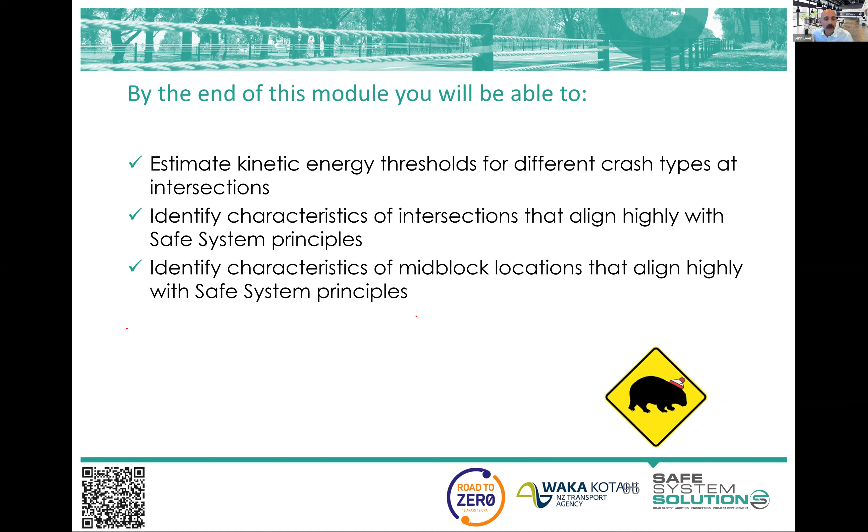So let's talk about intersections. Intersections are this interesting point on our network where we see increased risk due to a number of factors, the most obvious one being the conflict points that we have.

For those who aren't familiar with the term conflict points, I'll show you a conflict point diagram a bit later on, but it essentially is the ways that two vehicles, or a vehicle and another road user, can collide—that point of conflict.

So interestingly, when we see a graph of risk for a length of road, what we'll inevitably see is the risk goes along at whatever level it is, bouncing around a little, but then it'll spike, and spike again, and spike again—and these are our intersections. So we have a sort of mid-block inherent risk, and then we see a spike around that intersection due to those conflict points and the ability for that crash to happen.

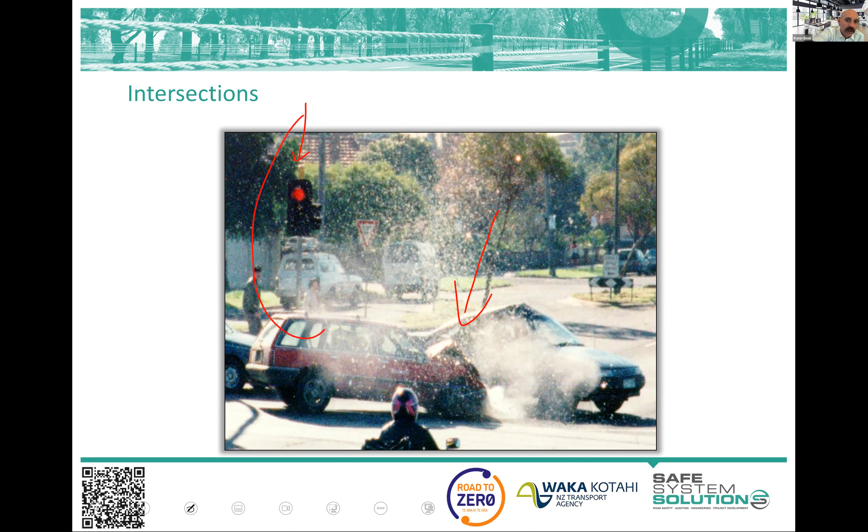And signal pedestals are a very interesting one because those are rigid hazards—some have some collapsibility or frangibility, but they're fairly rigid objects, and we place them very close to running lanes, just burying our head in the sand away from those as a run-off-road risk. Interesting way that we've just somehow decided that's exempt from being a roadside hazard.

But I'd love anybody's comments on that, or if they've done any work in that space. I know there's some investigation of a much more frangible signal pedestal, but I haven't seen anything significant. I feel there's some merit to that US style of casting wires over your road and hanging your signals, because you can get things further out, and use of mast arms and the like.

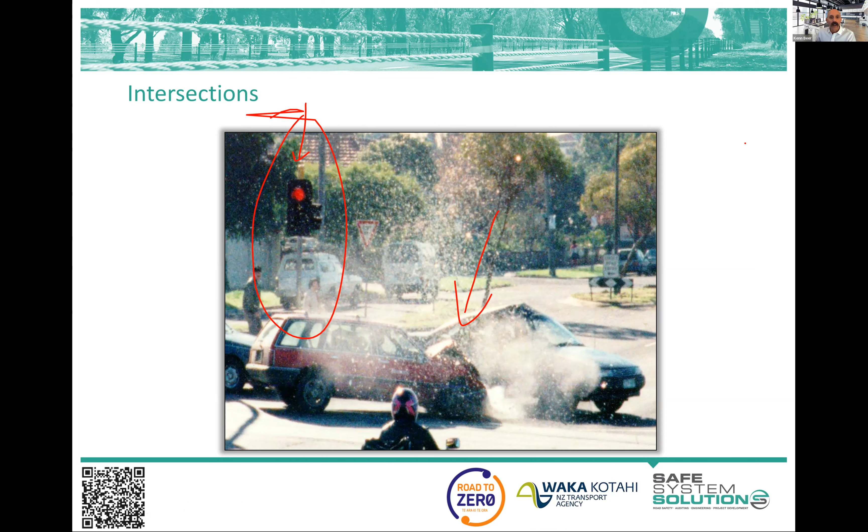Fewer vehicles and fewer intersections. What we're actually addressing with those two is the exposure to crashes. So we're saying there will be fewer people exposed to intersection crashes if we have fewer vehicles going through there, or we have fewer intersections.

Then if we're talking about conflict points per intersection—there's a whole raft of other stuff within that, but we'll just stick to conflict—that is the likelihood of crash. The chance that you'll crash increases with the amount of conflict points; there's just more chance that you will collide with somebody.

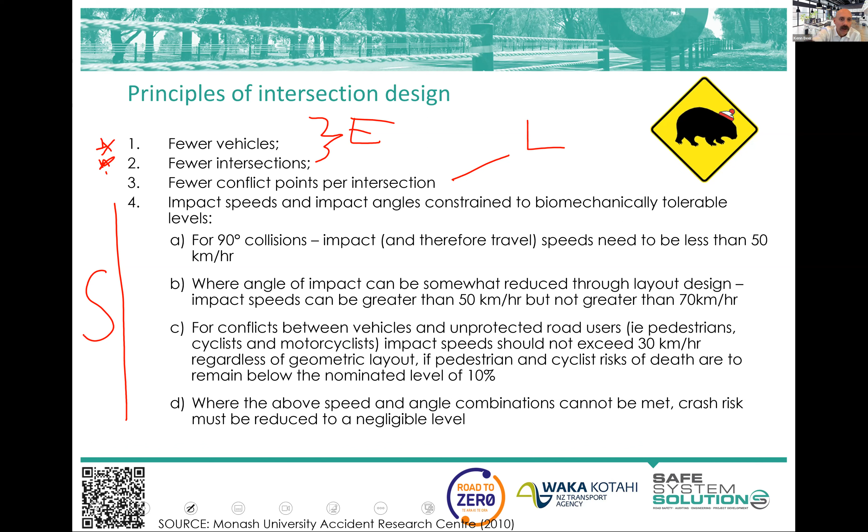Then we've got all of these things that address the severity of crash, which are speeds and angles, thinking about the biomechanics of the human body and how much force we can handle. So we talked about some of the speed thresholds, and we're thinking if it's a 90-degree collision, we're thinking less than 50 kilometers per hour. If you can get more angle on that, we can increase that speed.

So if you cast your mind back to your high school physics days and remember vectors at all—if you crash, or if you have vectors that are like that, you have some energy pushed out to the environment. If you have the vectors like that, more of the energy is pushed out into the environment. You can visualize that quite easily with vehicles; if they crash a bit more like that, they're sort of bouncing off each other.

So this is what we're thinking about, where we can get a little bit more speed out of an intersection by adjusting the angle that the crash might happen at. Of course, pedestrians, cyclists and motorcyclists—our vulnerable road users—we knew that threshold speed around 30 kilometers per hour. And if we're not able to meet these biomechanical thresholds, we should be looking to alter the intersection design, or the way we are exposing road users to risk.

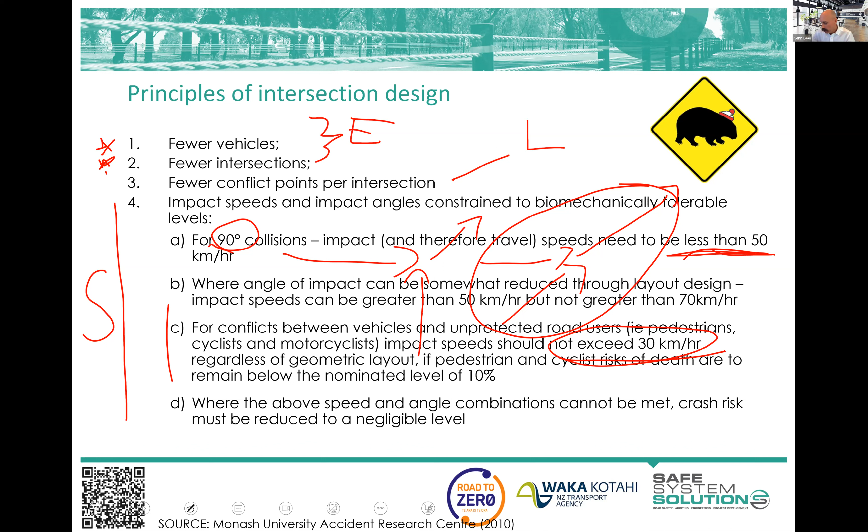So here's some more basics around speeds and angles, and this is passenger vehicle crashes. You can kind of have passenger vehicles crashing in pretty much any configuration at that 40 kilometre per hour, and everything's generally okay. I mean, we don't want that to happen, but we generally can bring that within survivable levels.

So if the threshold's about 50 for that right angle, being pretty much our worst crash type, then as we get more angle, we can get more speed, for head-on and rear end crashes. Now rear end's a bit of a funny one—there's a bit of industry debate around rear end and how that works. You've certainly got some physics advantages going with you, where vehicles are getting pushed forward and the like. But we do see some pretty severe spinal injuries and things associated with rear end crashes.

But generally, we talk about 70 kilometers an hour for rear end and head-on crashes. And at 80 kilometers an hour, we say not feasible—you cannot operate with our current fleet and the energy management and the biomechanics of humans; we can't operate an intersection at 80 kilometers per hour or above.

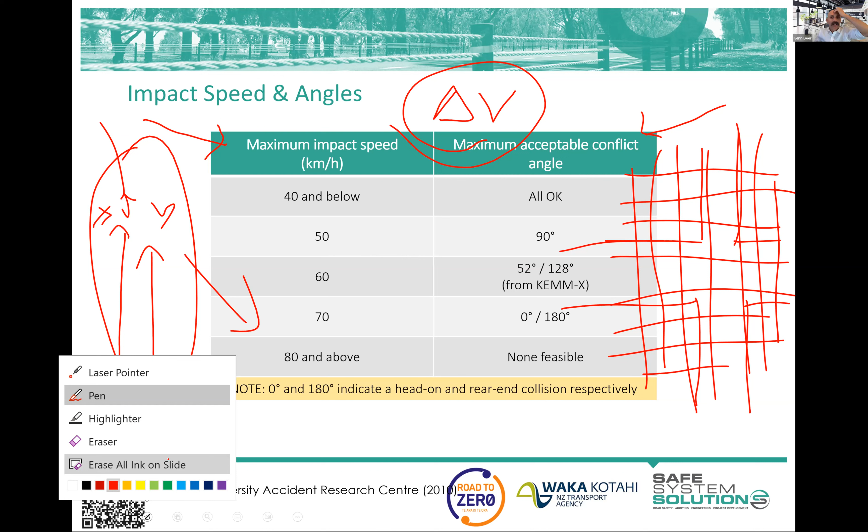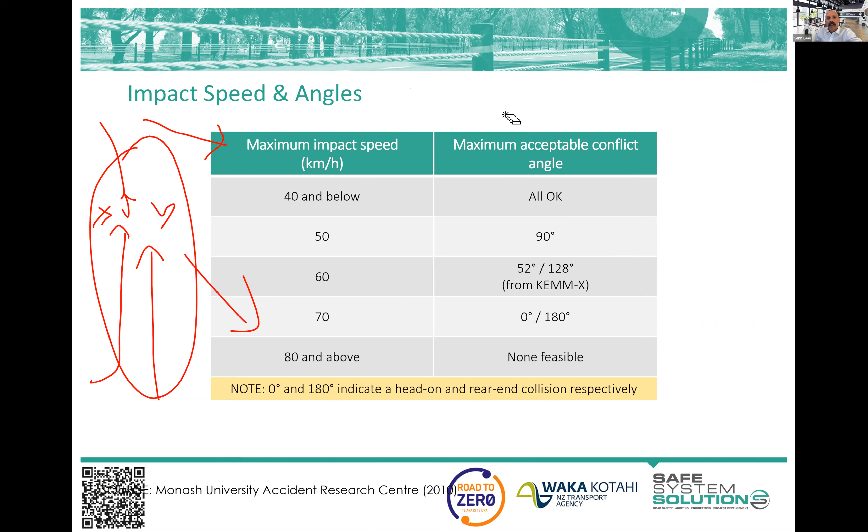It's practically, for our purposes, not going to be useful. It's not what we want to be doing. What we do is we look at an intersection and we try to holistically say how are we getting better alignment with safe system principles, or not getting better alignment with safe system principles, at this intersection as a whole.

So if we have an intersection and we block off a leg here, yeah, we've removed a lot of conflict points, that's for sure, but we have not changed the exposure at the intersection based on conflict points. We may have changed it based on the number of vehicles that get into that intersection. We'd be thinking about how many were in there and how many are now able to get in there. But the simple conflict point analysis - the fact that we've significantly reduced the number of conflict points - we're still thinking about exposure based on the number of vehicles, pedestrians, or cyclists.

So I'm going to continue to give you examples of this. Looks like we've got a hand raised. Kez, do you want to? Oh no, maybe that was an accidental hand raise. Somebody wanted to explore this in more detail. Yes, okay, an accidental hand raise. No worries.

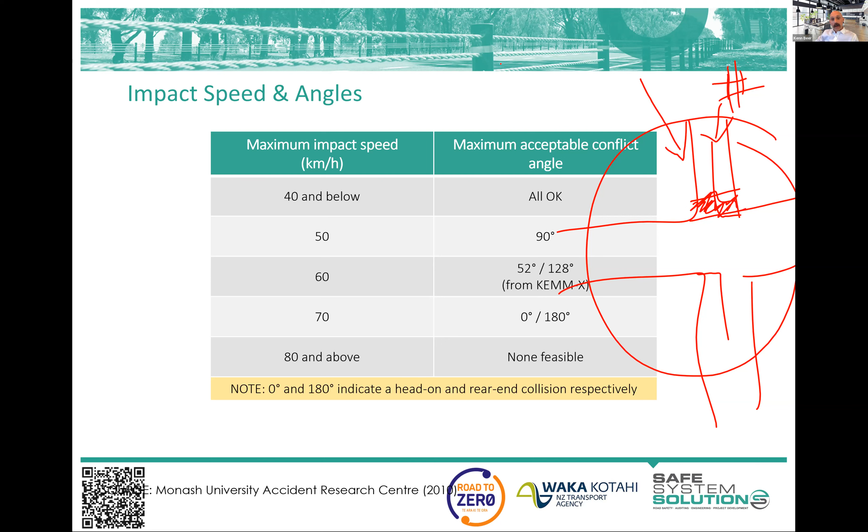Yeah, I'm gonna keep explaining this, and this is kind of the topic of your assignment this week, because we want you to really get that clear in your mind how you categorize these exposure, likelihood, and severity.

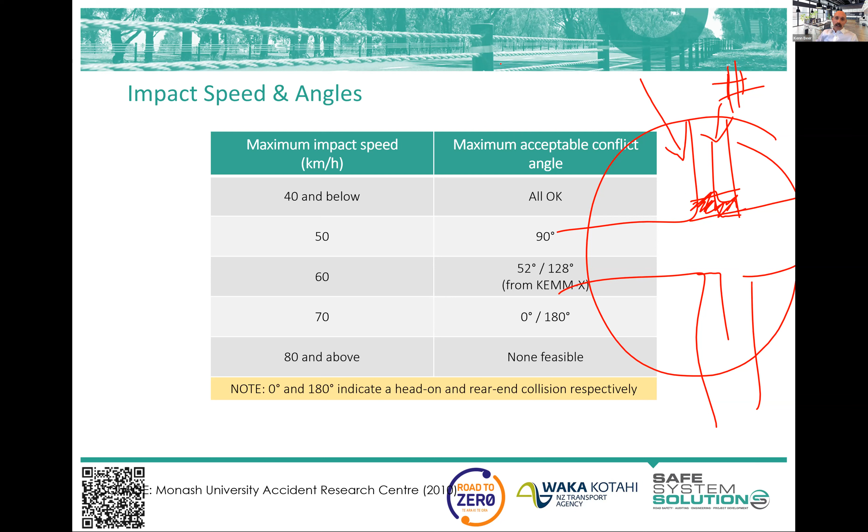Now, at a very basic level, I want you to start thinking about intersections and thinking about angles of crashes when we're thinking about crashes with passenger vehicles. You don't need to be this precise, as you see on the diagram here.

We just generally think through what's the crash that could occur and what's the angle that it could happen. I'd be thinking, okay, that's about a right angle. Peers that are designers here, using CAD, have spat out that it's 104, but it's kind of close enough to 90 degrees. That, I would be saying, okay, passenger vehicle to passenger vehicle.

I know I've got that threshold speed of about 50 kilometers per hour. That's what I'm aiming to get vehicle speeds down to, as in the bullet vehicle, the one that's coming in this way. Over here, I've got a lot more angle now on that bit. I could actually say that that's more like 60 kilometers per hour as my threshold speed. So you can see just immediately, I've got the road users involved in the crashes that I'm expecting, I've got the angles, and I'm starting to think about speed.

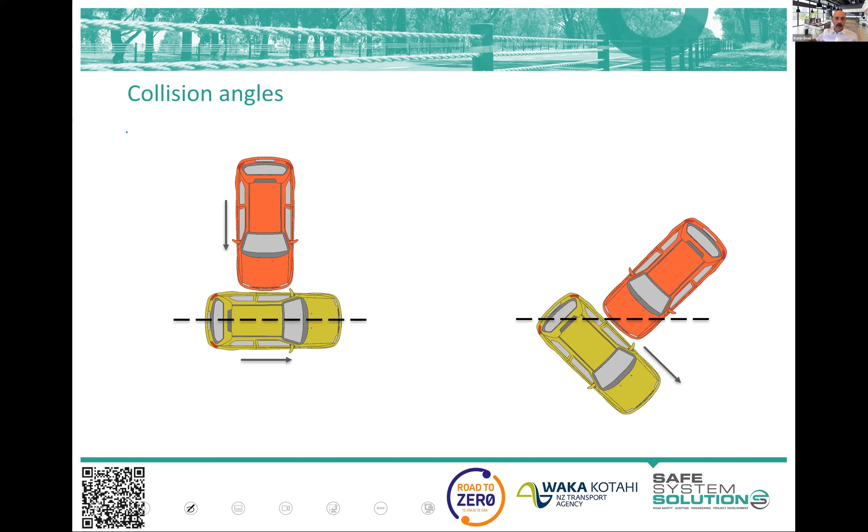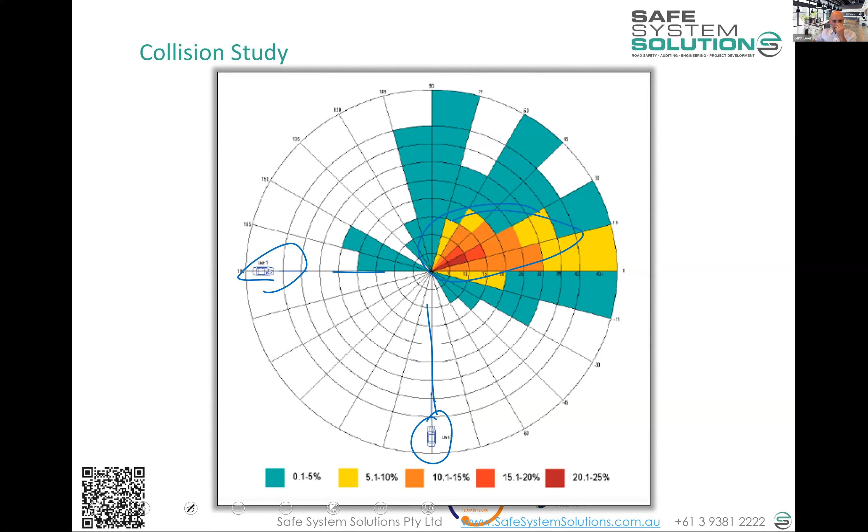And here's a bit of research that maybe didn't need to be done. It was done by the University of Adelaide, the Centre for Automotive Safety Research, looking at a whole lot of intersection crashes and the secondary impacts that cause death and serious injury. You can see they replotted them all onto the axes here, where the vehicles came in, and that's where the secondary crashes were mainly occurring. I think I probably could have given you a blank one of those and you would have come up with pretty much the same, but it's just something to be thinking of.

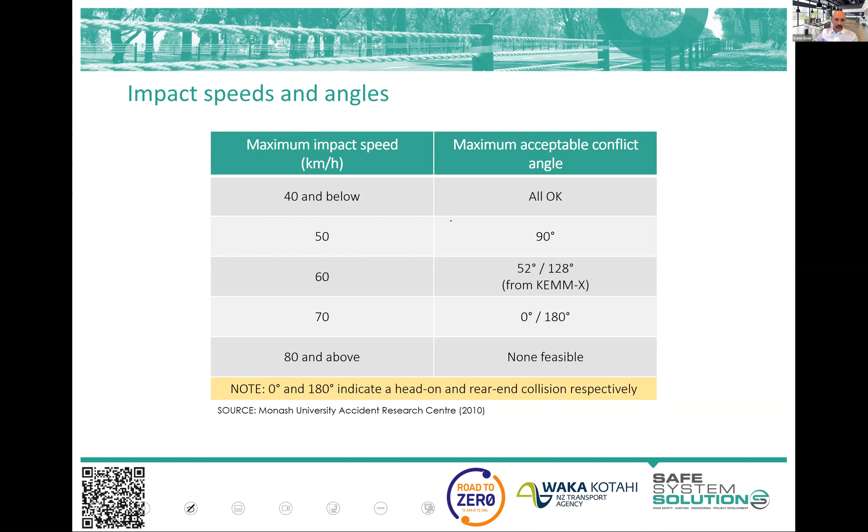So I can't stress enough that you need to start equating angles for passenger vehicles, speeds, to energy thresholds.

Okay, I'm going to give you a little task to do. I'll give you a little bit of time to do this as well. It's what I call the safe system intersection exercise. So we have an intersection here. It's existing, obviously, because you can see it. And I'm going to give you some information about this intersection and then give you your task specifics.

So what we have here is, let me change color here to red. We've got an arterial highway, like a highway, and we've got a 70 km/h speed limit on this 2-lane in each direction road. It's a highway. It carries about 12% heavy vehicles. It's got somewhere in the order of 22,000 vehicles a day. It's a bus route. That's a bus stop there.

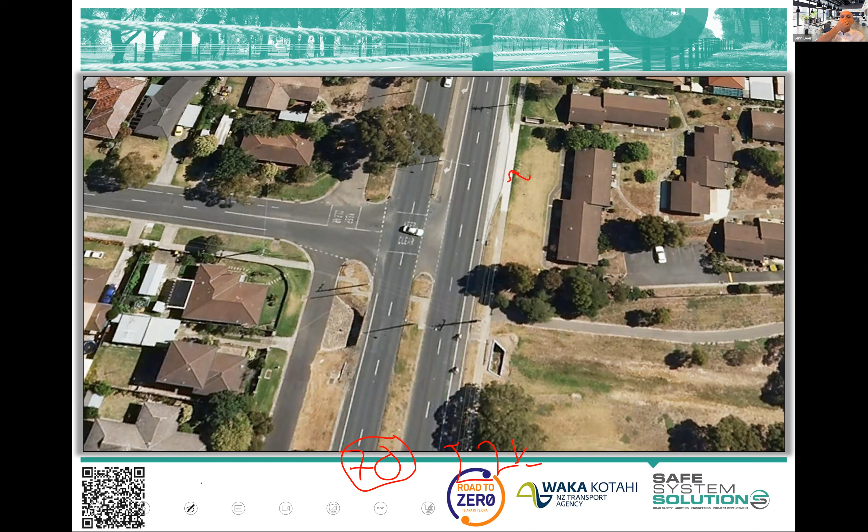This side road, the intersecting road, that's a 50 km/h local collector road. It has about maybe 2,500 vehicles a day, so it gets a bit of traffic. There's a school sort of down the road here, quite a large school, maybe 300 to 400 meters down the road. This is all residential area, as you can see.

This is like a drainage culvert, drainage structure. That's a shared user path, for pedestrians and cyclists. This is a service road, two-way service road. And there's a bit of a pedestrian refuge there, and then what I would call a Danish offset crossing or a Z crossing, which is annoyingly the wrong way around, because you should face traffic as you walk into it and walk along. But I've got it the other way around. Minor little issue, very minor.

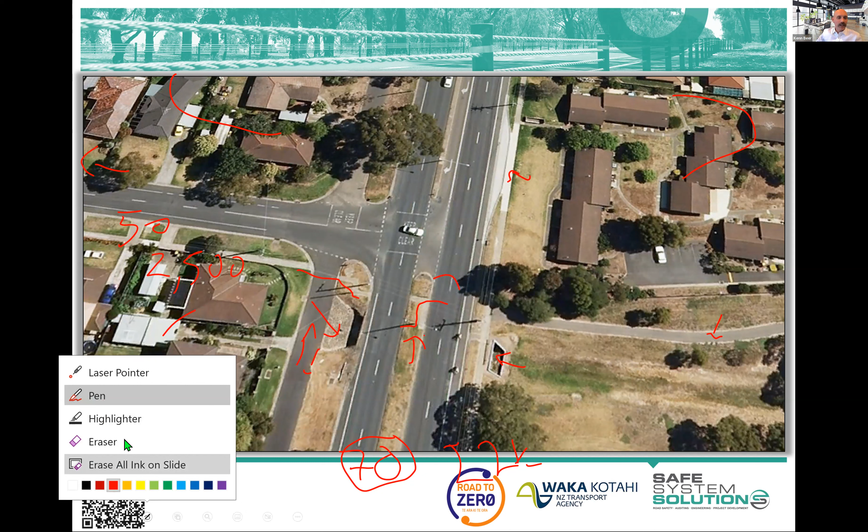That's not going to be the source of our major death and serious injury, but probably one that makes the road safety auditors in the group's eyes twitch when they look at it.

So yeah, that's some intel about this intersection.

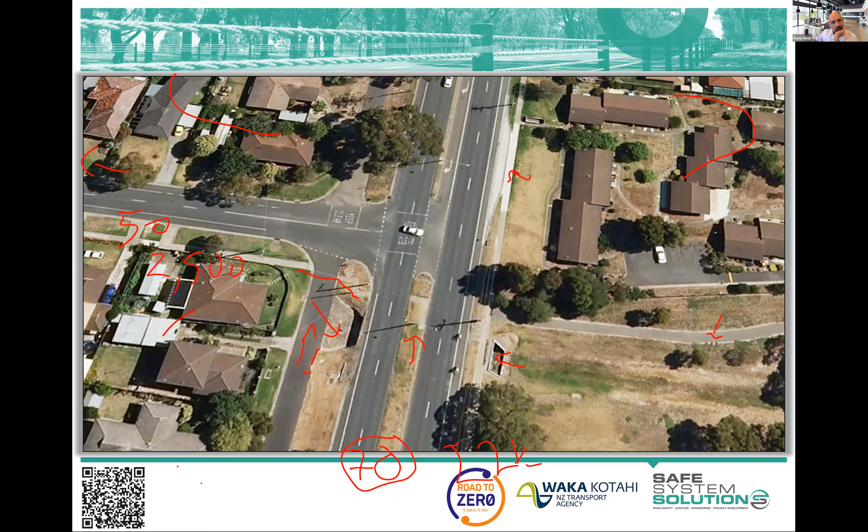So let's have a look from the ground level. You can see it there - that's where that intersecting road comes out, and see the bus stops there. You can see it's got a turn lane, lighting.

Let's have a look from the other direction. There we go - you can see over here is our shared user path that comes in. That's the drainage culvert structure thing there. You can see a sort of shoulder/bike lane thing going on here.

So what your task is to alter things so we remove death and serious injury crashes at this location.

Now, I'm going to give you a budget. Because I like this group, I'm giving you an extra $1 million - you know, $4 million.

But you can't close the intersection because we've done the community consultation. There's really no other good ways out without running a whole lot of vehicles and buses through residential areas for a significant period. So that's unacceptable, and you're operating within the current political and organizational framework that you're currently in.

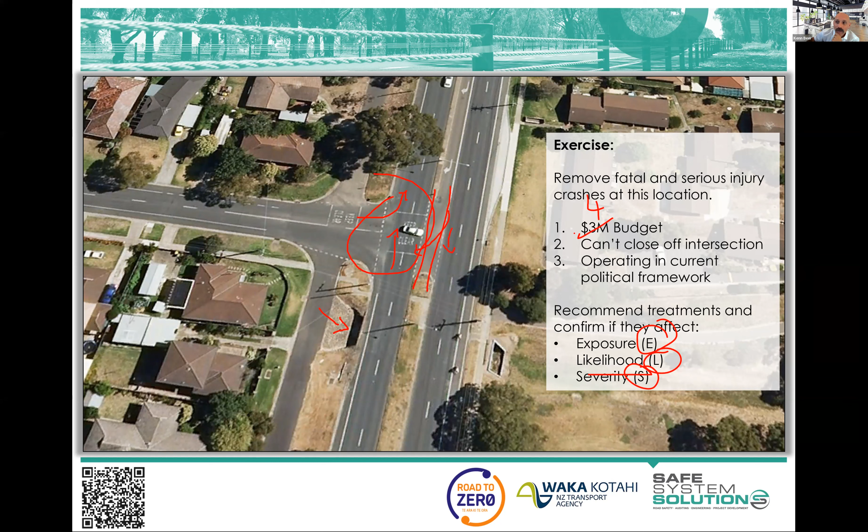So Karen's popping in some guardrails and very well identified that is a reduction in the severity of crashes. So if we were to put guardrails along here, vehicles would leave the road. They wouldn't fall into the culvert. They would hit the barrier and they would run along the barrier. But that's still a crash - it's just a much less severe crash than dropping into that culvert. So spot on there from Karen, that is a severity reduction.

And that's a little tricky one, I think. So that's prize-worthy as well, Kez. So Karen can have a prize for that.

So I'm just, now this is where I'm going to skim through a little bit to look for some things that are a little bit out of the ordinary, or sorry, out of what most people seem to be saying.

So Douglas can have a prize for his accurate categorization there. Raised safety platform on each leg, severity - correct. Traffic signals, likelihood - correct. Reduced speed limit from 70 to 60, likelihood - correct. You could almost put in there severity as well.

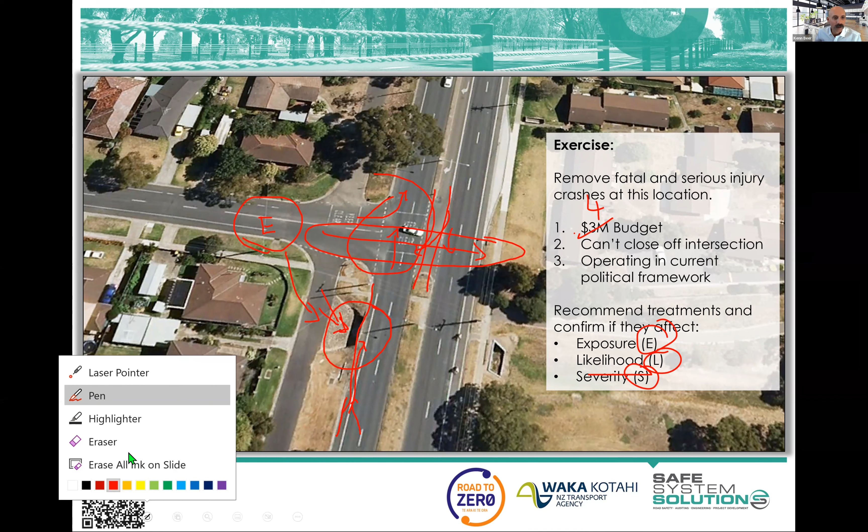Oh, I'm struggling to get my... bear with me a second here. That's what I'm trying to do. Too much writing on my slides already.

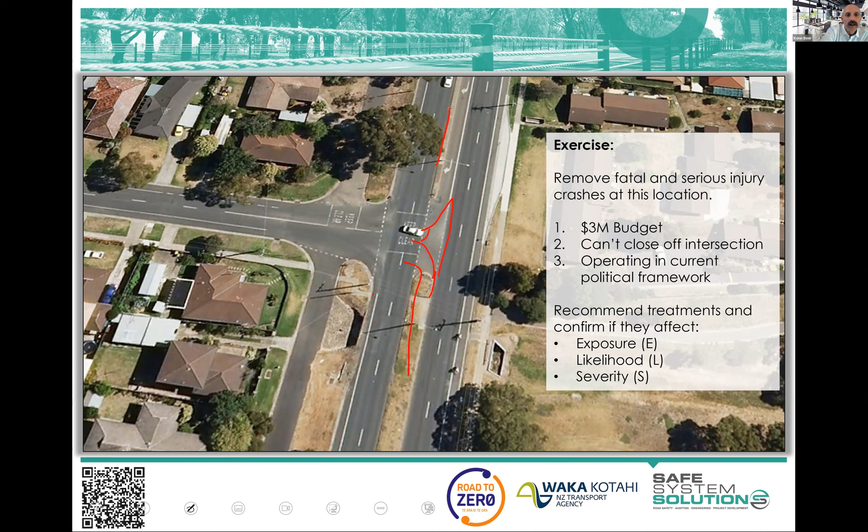A seagull intersection, for those who aren't aware, would have some sort of acceleration lane and a separator. Vehicles come out and then accelerate down the road.

This is probably one of those cases where, going back to earlier comments, it reduces the severity of the crash because of the crash angles. But the likelihood of a crash goes up because merging from the right is an ugly maneuver, looking across the wrong shoulder. If you've got an articulated vehicle like a truck carrying something, you can't turn your head and see. Old people often can't make those head checks either. It's just very awkward, and you'll significantly increase crashes in a lot of locations depending on how it's designed. We still get crashes there that are pretty much 90 degrees, so there are challenges associated with that.

But there are situations where seagulls might improve things. I personally don't like using seagulls, but there is some interesting work that was done by New Zealanders.

Shane Turner developed this, and for some reason, John, I reckon you might have been involved in this—correct me if I'm wrong. It's a seagull intersection assessment tool, so you can plug in all your data—volumes, speeds, configuration—and it spits out a risk score and an indication of the risk associated with a seagull.

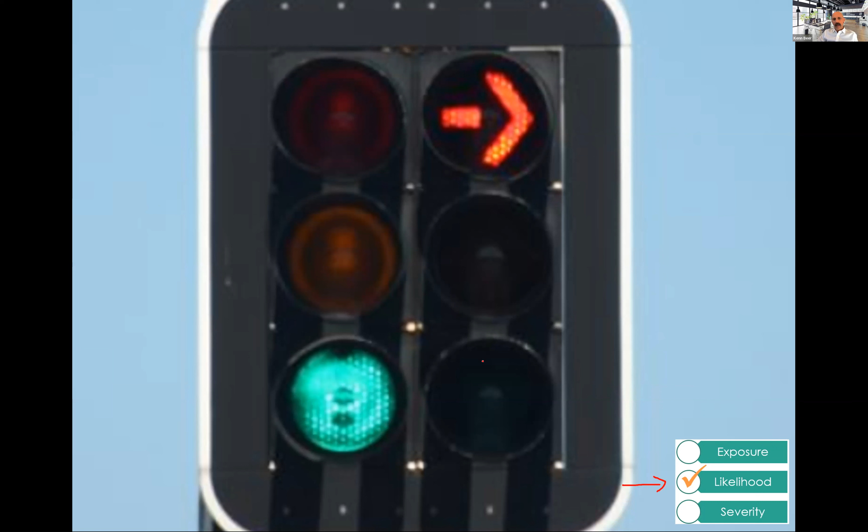Signalization was identified pretty early on as a pretty viable treatment. I think that shows people understand how a network functions and what treatments to use. But we solely attribute the risk reduction with signalization to likelihood. Now, there's an argument that some crashes happen because people see the red light and slow down, so when they crash it's at lower speed—surely it's severity as well. And yes, that's true, but there's still very much the potential for somebody to continue through at speed.

We see that a lot—people run the red light, and we see those crashes happen at the same severity, sometimes even higher, because they're putting their foot down. Sometimes people say we've reduced the exposure because, take this example, they've given a red arrow, meaning they're not exposed to the crash because they've been told not to go. But under safe system thinking, we have to acknowledge that people will make mistakes—they will run red lights, they will turn when it's not appropriate, these conflicts will still exist. The number of vehicles, pedestrians, and cyclists through that intersection doesn't change by putting signals up, so the exposure doesn't change. We're just addressing likelihood with traffic signals.

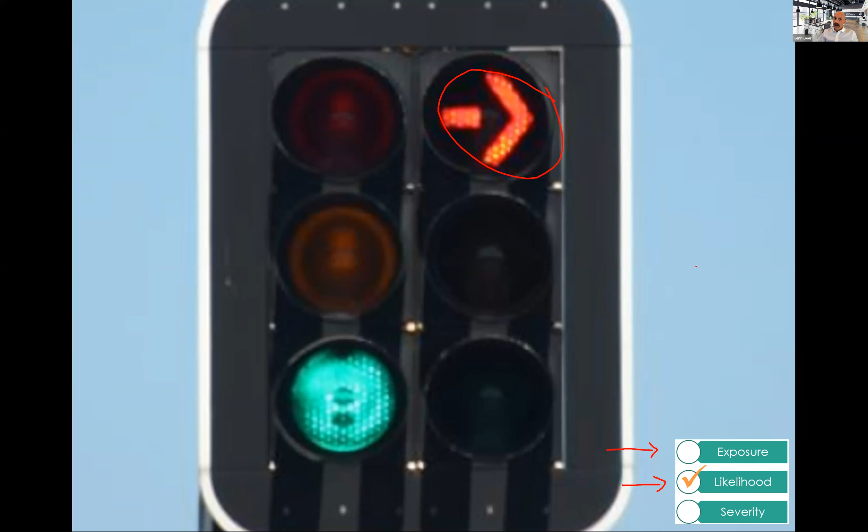They are an effective treatment in reducing the likelihood of crashes. Rule of thumb: 45% reduction in crashes associated with the introduction of traffic signals. That's pretty good, right? So absolutely not a bad treatment from that perspective.

When you analyze the biggest location, the spots of most death and serious injury on any road network, the overwhelming majority are large signalized intersections. It's just that they are often put into this category of, well, we've done everything we can, and people just need to start following the rules and not running red lights. That's where we've really got to question this, don't we?

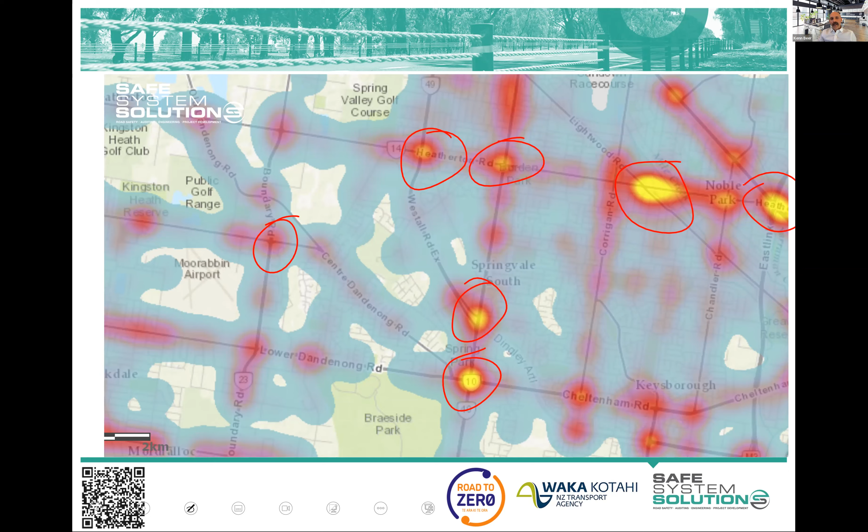So roundabouts, and I like the fact that a lot of people said, can I afford a roundabout, can we get that in? Roundabouts we attribute to a reduction in the severity of crashes. Somebody also mentioned likelihood as well, and I like that because they're thinking about reduction in conflict points. What we tend to see is this shift with the roundabout. We get about the same number of crashes when we have a roundabout or a priority controlled intersection with give way signs, stop signs, and things like that. It's just the severity is so much less.

We actually sort of alter crash types here. There's a lot of rear end crashes, minor crashes, little bumps and scrapes at these sorts of intersections between passenger vehicles. So we generally, in a safe system assessment, attribute it all to a reduction in the severity of crashes when we're thinking holistically about that. Roundabouts for passenger vehicle to passenger vehicle crashes are just amazing, right?

I'll talk about pedestrians and cyclists. I see comments coming in about pedestrians and cyclists at roundabouts, and there's some really wonderful things we can do for pedestrians and cyclists at roundabouts. But if we're just talking passenger vehicle to passenger vehicle, these are just amazing features.

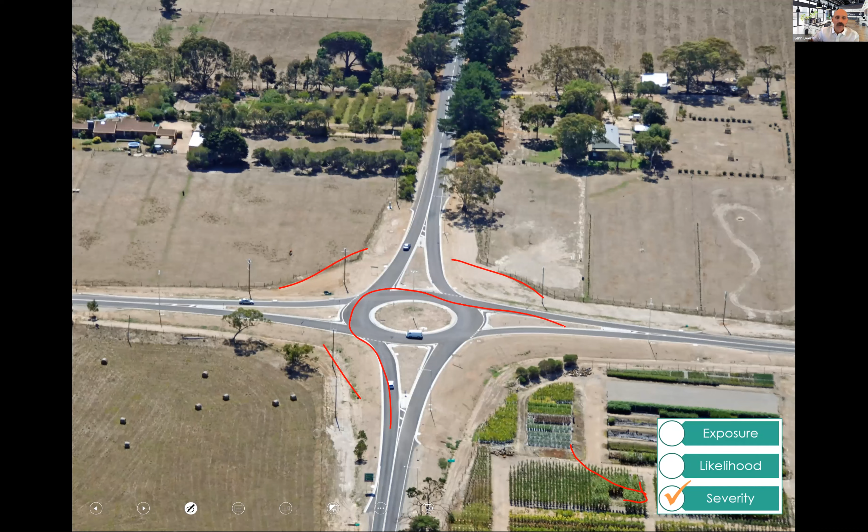What about just something little like this? Very different road environment, isn't it? But nonetheless, these road environments - and something like this will cater for larger vehicles because they just run over the top of it, won't they? Yeah, you might need to just check your swept path on the splitter islands and those sort of things, but you've sort of removed that part of it.

But then you might think, well, have I just lost all the advantage of that deflection and the like? Well, the advantage and the reason these actually work quite well - not as well as a big roundabout, but pretty amazing for what they are - is because we have eliminated the perception of absolute priority. When I say perception of absolute priority, you could say absolute priority. What do I mean by that?

If this was a T intersection and this top road just had free flow priority, vehicles would go through here with drivers somewhat tuned out, carrying on at the speed they're carrying on, pretty much oblivious to the fact that there's an intersection. We'd love drivers to be alert and have a look, but they don't - that's not how the bulk of the public are driving. But as soon as you put this in, we disrupt the absolute priority. So a vehicle approaching here isn't sure that they're not going to have to give way. Same here, same here. Everybody slows down, has a look around, wakes up. We've got wins.

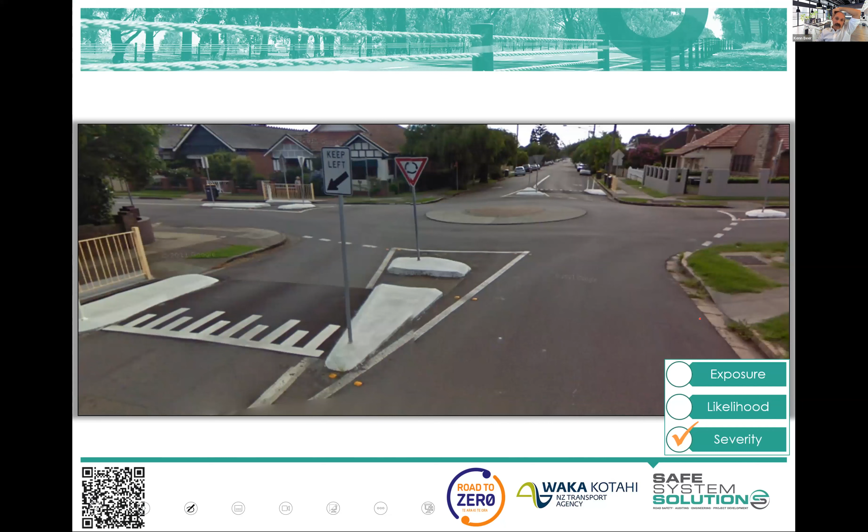If you're worried about fast speeds through and the fact we haven't got angles altered, you can put raised bits and pieces around your roundabout to slow vehicles down, speed cushions, lots of options for that. So we can get some pretty good treatments. Max McArdle, my colleague, is going to take you through some pedestrian and cyclist stuff, but often utilising these as raised pedestrian crossings can be a pretty awesome thing. I'm loving seeing the deployment of that around Aotearoa.

It's quite exciting. So, roundabouts - back to passenger vehicle to passenger vehicle crashes. This is Road Safety Engineering 101, it's almost the first thing you get taught, isn't it? A roundabout has a very small number of conflict points, whereas a set of traffic signals or a passively controlled intersection has a whole lot of conflict points. There's your conflict point diagram, just the ways crashes can happen. So that's one thing, and the way those crashes can happen.

There's our example of where we actually do have pretty good sight lines and a really good crash angle, if you're thinking about crash angles.

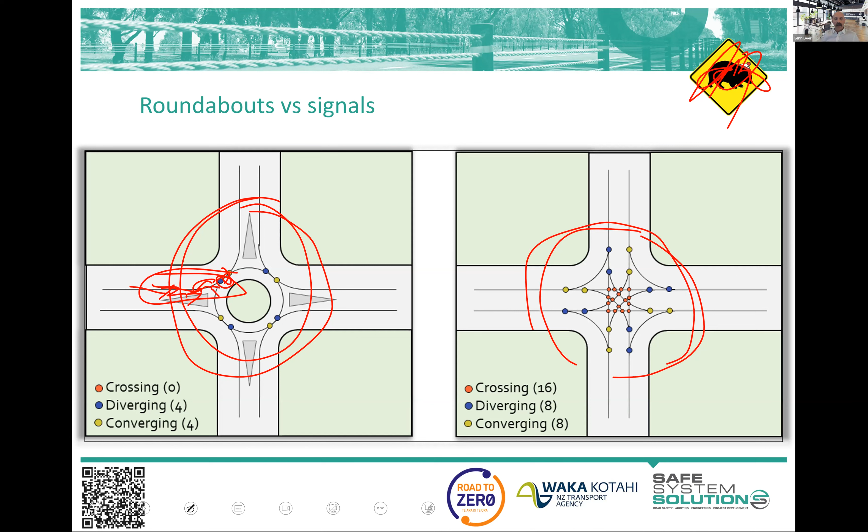I do agree wholeheartedly that it's a much simpler thing to do and it's easier to navigate. Traffic signals, I suppose, though, are fairly easy to navigate if they're done well - it's just a clear stop or go and turn or don't turn. There's just more, I suppose, conflict points there. Hopefully that helps out a little bit.

So we were talking about angles of crashes. And this one's, I suppose, that last little thing I wanted to point out just before we have a break - that disruption of absolute priority, where people drive in all states of consciousness. And I really, we all wish that drivers would be alert and compliant and have a good night's rest and a cup of coffee, and they're really focusing on this driving task. That is just not the case.

They're driving half asleep, they've worked a double shift, they're thinking about the fight they've had with their partner, they've had a few beers, they're making a cannonball run to their brother's wedding to try to get there for the morning. It's just horrible, the states people drive in, right? And you can get angry at it and just push it all back to them and say they need to be better and it's not our issue. Well, it is our issue. I mean, that's what we're dealing with.

And if you're an engineer or a designer or a tech officer or whatever you are, our responsibility is to account for that in our design. Okay, if you want to try to address that, we need to maybe go into another field of road safety and start working on other things. But that's not going to be resolved. But we can design intersections to wake people up.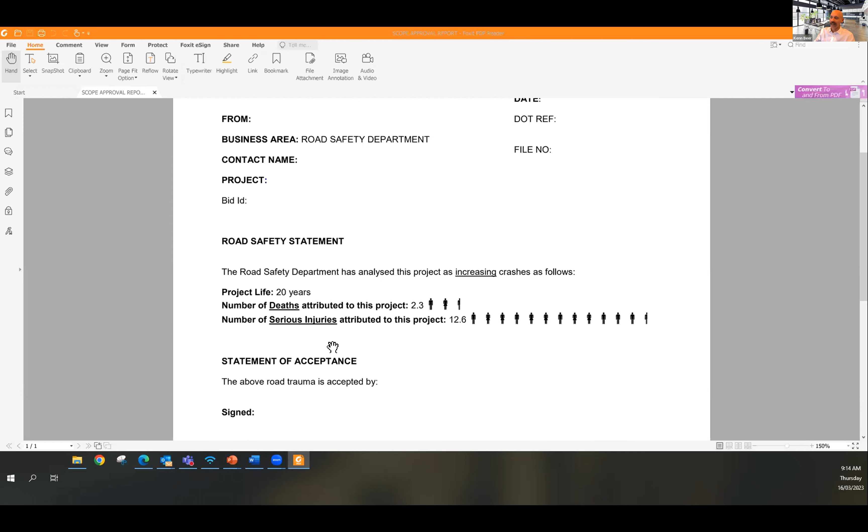It said: the road safety department has analysed this project as increasing crashes as follows. Project life, 20 years. Number of deaths attributed to this project, 2.3 - we put little people there, just to hammer home you're going to kill some people here. Number of serious injuries, 12.6. Statement of acceptance: the above road trauma is accepted by... And so that sat on top of our report back to them.

Yeah, so I hope you can see that screen - Kez, can you see it? Yes, I can see that. Good. We were, to a degree, intentionally disrupting things. Did we ever get any signed? No, of course we didn't. Nobody was signing that. Did we get some pretty angry people calling?

Well, we did - dragged into executive directors' offices, and told: we have a lot of competing demands in the management of the network, and you don't boil it down to these simplistic statements. Well, just if you're going to kill and seriously injure the community for a bit more travel time, okay, sign up to that. Anyway, so they didn't like that. But nowadays I think we don't need to be so inflammatory, because a safe system assessment kind of does that in a much more palatable way.

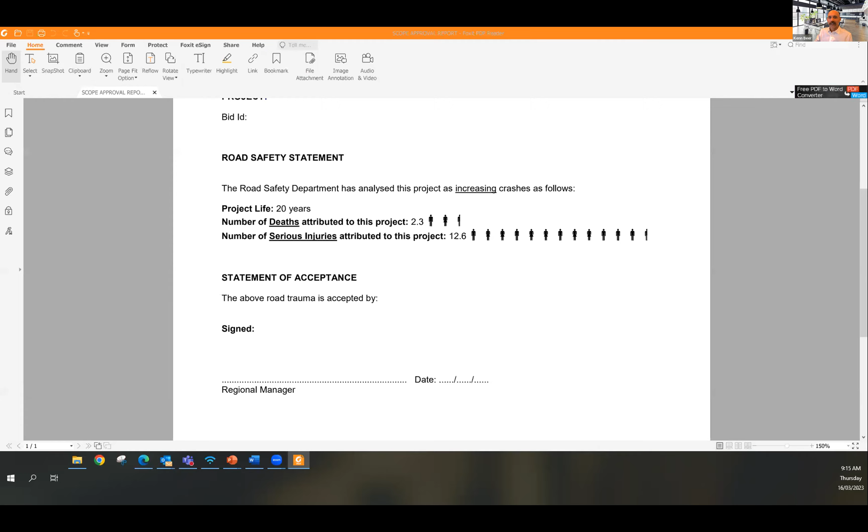Anyway, just thought it was an interesting little case study. The actual working out of those numbers is very easy - you can go into absolute precision on how you do it, but at a general sense, it's sort of like a 10, 15-minute exercise, and you can work that out from existing to the future scenario.

Now, roundabouts aren't all the same, and you don't get as much safety benefit with different roundabout configurations and design - it's a fascinating area. I've been getting a lot into it, writing some roundabout design guidance for different governments in terms of compact roundabouts and those sort of things. But I throw this in as an interesting one for you - double lane roundabouts can cause trouble, especially if the inner radius is small, you can get high speeds. But turbo roundabouts, which are two-lane roundabouts, bring that speed back down to a really interesting level.

So a turbo roundabout, for those who aren't familiar with it, has a raised concrete separator on the approach, dividing your lanes. So if you want to do a right turn, you get into that lane, into the middle channelized area, and you track around out.

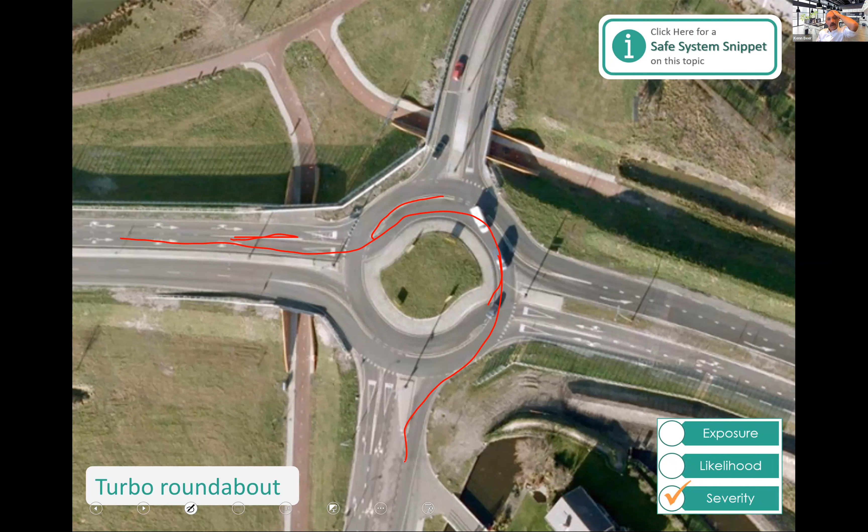It's pretty exciting performance out of these. You can see another one there. And I love this one.

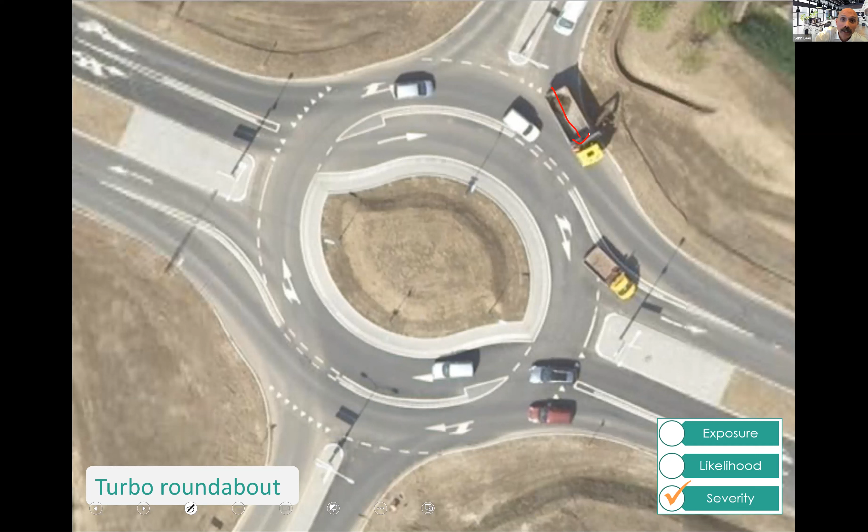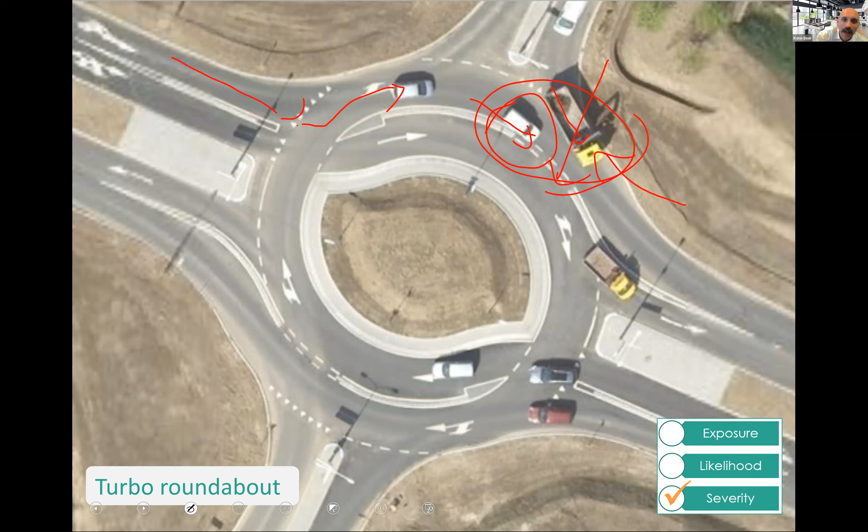Have a look at this. You've got a truck that's obviously made an error, because hey, humans make errors. And we've got this vehicle coming up here. Look at the angle of crash, if that is going to be a crash - it's beautiful. We know this white van is going slow, it has to be, it's got a nice radial roundabout structure to it, it can't be going fast. So we've got this beautiful, wonderful conflict happening here. If that was a signalized intersection and a mistake had been made by this vehicle and it had come out, it's less likely that they would have come out, absolutely. But if they had, the angles would have been horrible, the speeds would have been bad, and we would have seen a worse outcome.

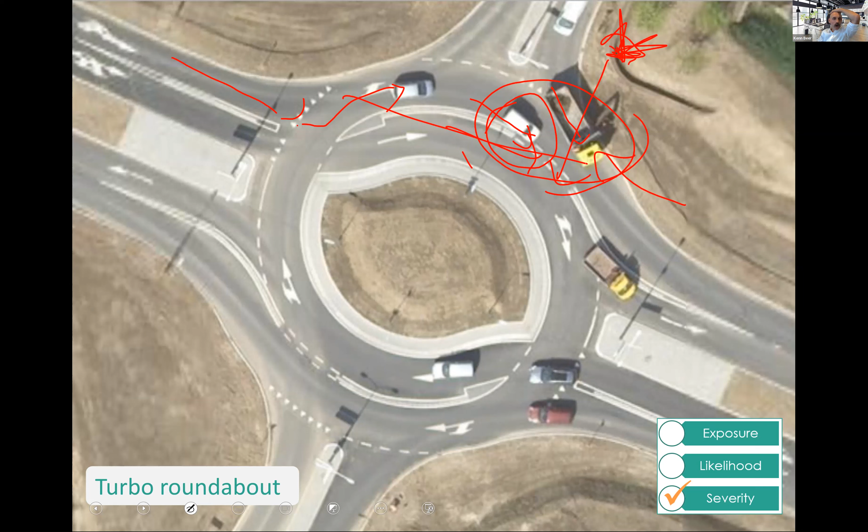Do we have any examples of turbo roundabouts in New Zealand? Yeah, that's a good question. I don't know, I think there's some sort of half hybrid turbos, and I think we're getting some off-ramp examples and things, but I'm not too sure on that. It's a good question.

Why do I put this up there? Well, it's just awesome, that's the first one. But the second reason is another story I've got, where we had this Dutch road engineer who we brought over to do some work with us on cyclists at roundabouts. And I just happened to have this picture - I'd not been to this location, but this is in the Netherlands. And I was showing that to this Dutch engineer, and I said, this is amazing, the sheer land take of this is huge.

And the complexity of it, he said, well, it's not that complex when you're on the ground level, you just follow your path and it's channelized. And like I was saying, but in Australia, based on what you're seeing there, this would just be a large signalized intersection, and it might get grade separated at some point in the future, but it would be a large high-speed signalized intersection. And this just couldn't compute to the Dutch. He's like, at what speed? And what about all the death and serious injury that would occur? I'm like, yeah, I know. He just could not fathom that you would run a large signalized intersection with volume at the speeds we do it. They'll go to these lengths, not to do that, but to slow vehicles down to improve angle.

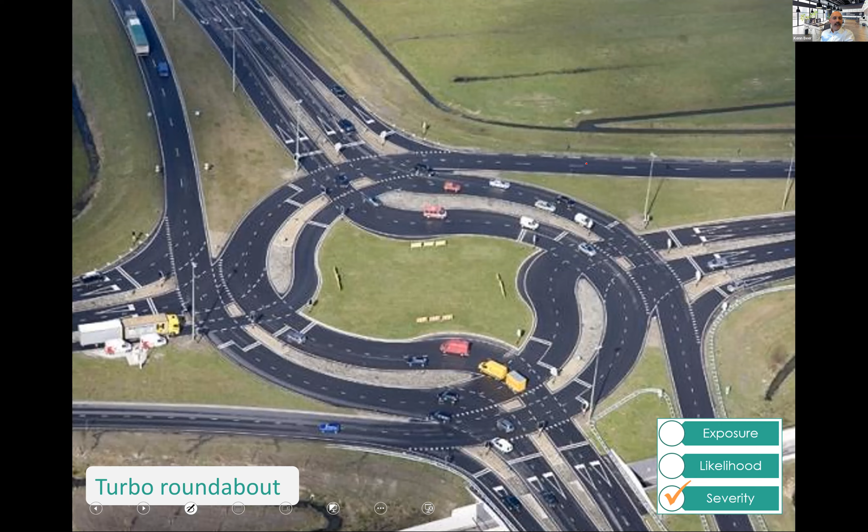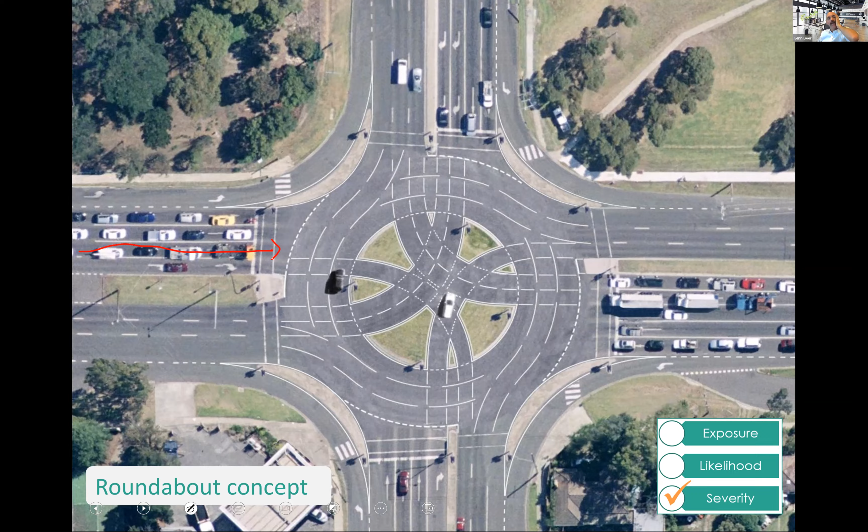But as I talked about earlier, the idea of raised safety platforms, raising arterial roads and the like - 10 years ago, just absolutely not, get out of the office, you're not talking to us about raising anything, no vertical deflection on the arterial network, that's absolutely not going to happen. We've changed, and it was wonderful to see so many people suggesting that, or at least contemplating the idea that you could raise it.

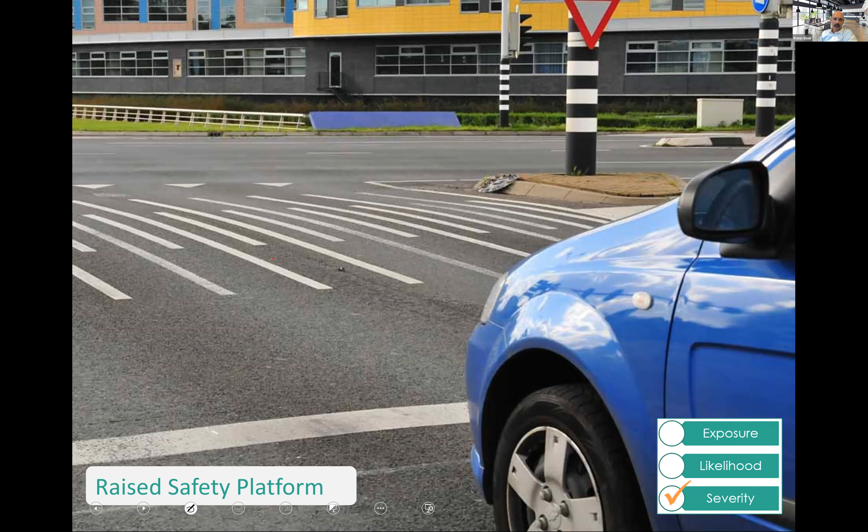The first thing is to get out of your mind that this is like an urban speed hump. It is something where you can change ramp angles, grades and heights and things, to get different speeds as you like. So that intersection you were looking at, the proposal, they came to the conclusion, as many of you did very quickly, that signalisation is what probably needs to be done there. But they knew there were signals down the road, and lots of signals in their area that had lots of death and serious injury.

They were finally at the point of questioning: are we prepared to just put another one in and expect some miracle to happen, that people won't run the red light and everybody will absolutely conform? But they were sensible enough to say, that ain't going to happen. So we should try to lessen the severity, get the speeds down a bit as they go through this conflict point. So they looked at these raised platforms only on these approaches.

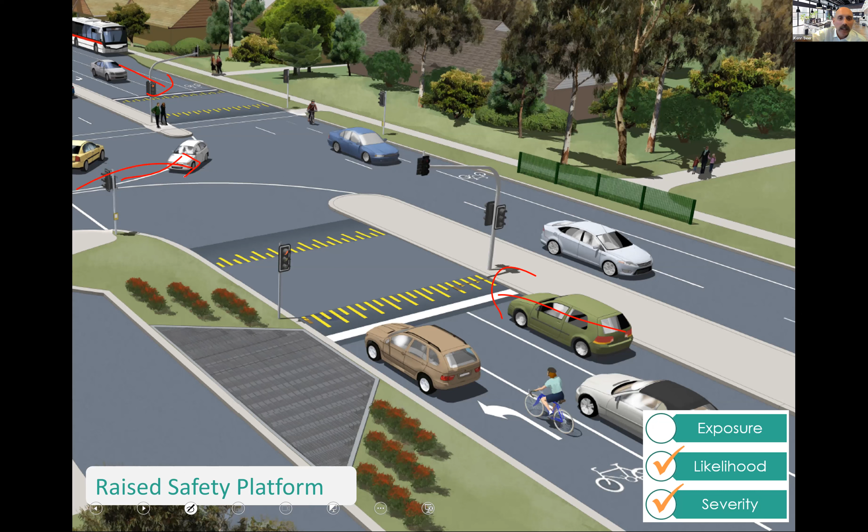Why only on these approaches? Because they're the bullet vehicles, aren't they? They're the ones doing the damage. These vehicles coming in and going out, they don't have enough speed to do damage to vehicles - to pedestrians and cyclists, yes, but if we're thinking vehicle to vehicle, they're not the bullet vehicles. So it's just about dampening speeds here and here.

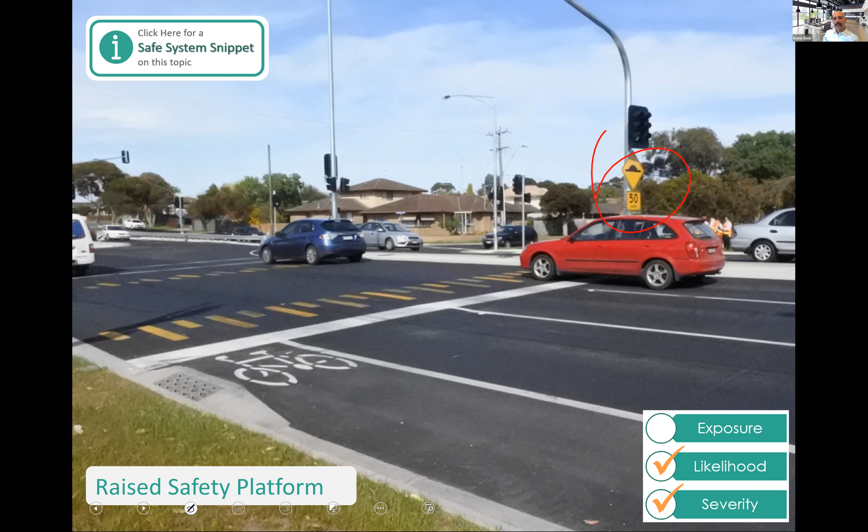And so they built that one, and that's one of the examples. There's lots and lots of examples out there now, and you've got some springing up nicely around New Zealand. You can see there, slowing vehicles down to 50 kilometres an hour, because their dominant concern in this environment was vehicle-to-vehicle right-angle crashes. The threshold speed is 50, so they designed the ramp grades to try to get vehicles down to 50 or below.

And I really love this photo. I was out there with a colleague doing the post-opening road safety audit of this new intersection, and we see a vehicle slowing down at a green light. That's just a huge win, because this is the conflict point, this is the area of increased risk, and they slow down to go through.

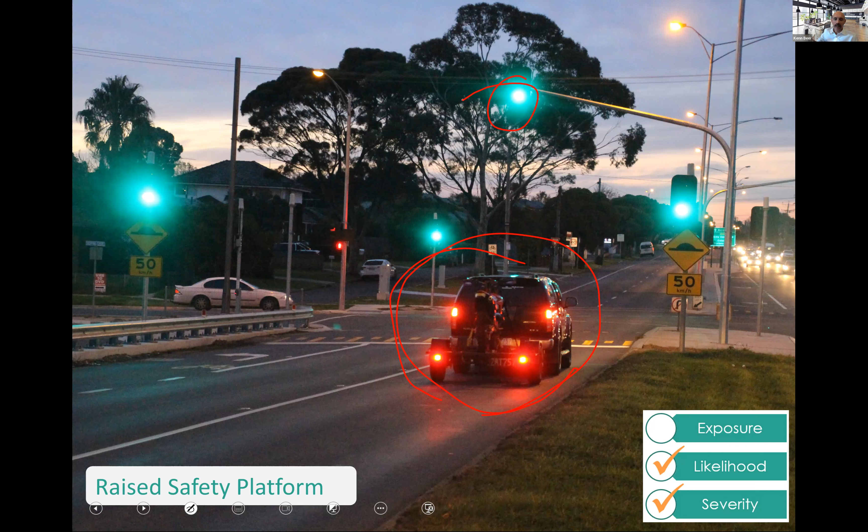And traffic operations people, they just go mad when they see this photo. They're like, this is so inefficient, I hate this, we're impacting on every vehicle that goes through there for this one-in-a-million chance. I'm like, well, if we'd built a roundabout there, everybody would have slowed down and you wouldn't have been shouting the same way. But the fact is this is different, it's not something you're used to, and so of course they get angry at it. That's human nature - change, difference, resistance. So we just work through it.

I love this one as well, because anybody who knows the traffic engineering concept called a dilemma zone - the dilemma zone is that point in time and space where a vehicle is in a dilemma as to whether or not to put the foot down and go through the orange, or to brake and stop. I'm sure you've been in the dilemma zone. The dilemma zone is just shrunk and almost eliminated with the addition of that simple little raised platform.

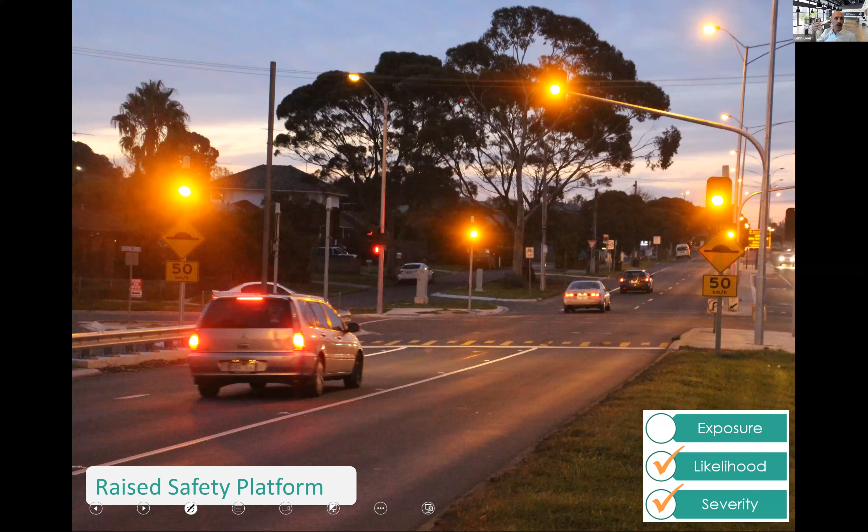Because the drivers, they don't want to put the foot down. There is a little dilemma zone, but they will brake - they're already braking on the approach to it. So it's just a wonderful little spin-off benefit.

There's your Hamilton one, just outside Hamilton, Gordonton - Thomas and Gordonton, I think, yeah, that's it. So a nice little example there, your local one, award-winning stuff.

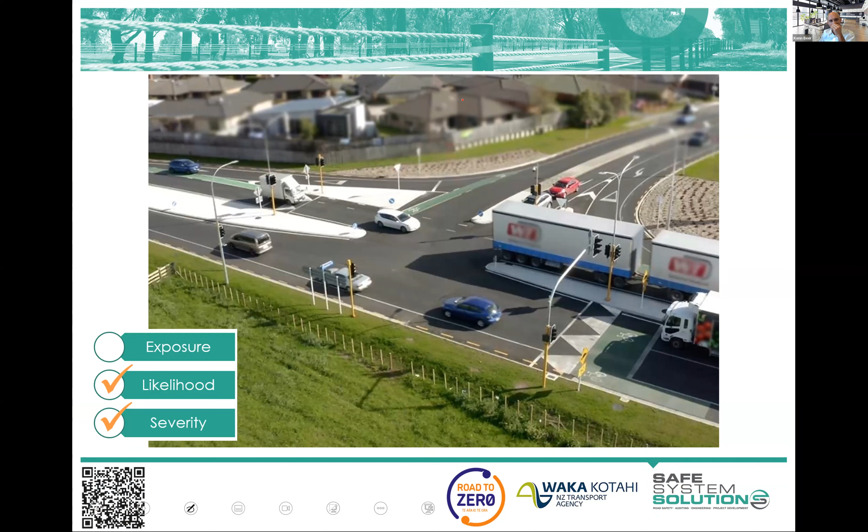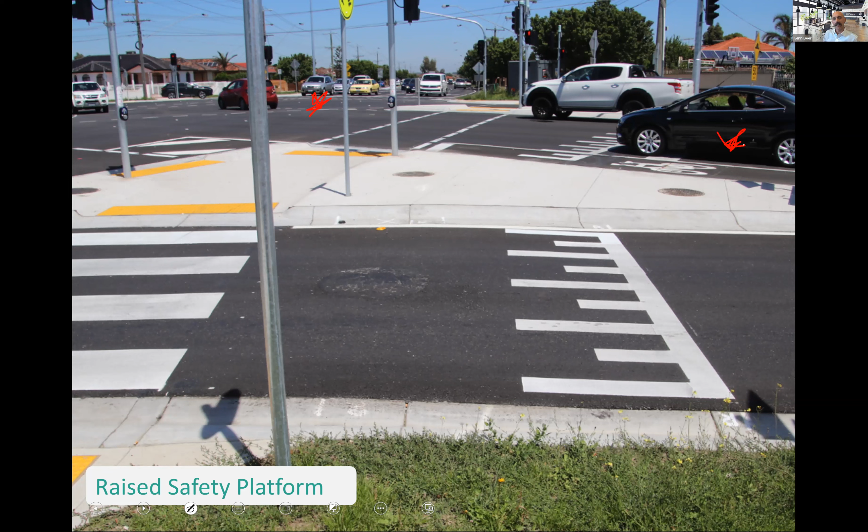And lots of examples from around Australia and New Zealand now. People say, oh, it's only for your lower volume roads - this road carries 55,000 vehicles a day, major heavy vehicle route, bus route, emergency vehicle route. This one carries at least 25,000 vehicles a day. These are big intersections.

I love the fact that this one used to be a roundabout, and only 3 years ago a congestion-easing program ripped out roundabouts and put in traffic signals. But there was a mandate for safe system assessments, and the safe system assessment on this one showed that something had to be done to keep speeds down, and they elected to put in raised safety platforms here. They could have signalised the roundabout, they could have done other ways to do it, but that was pretty exciting.

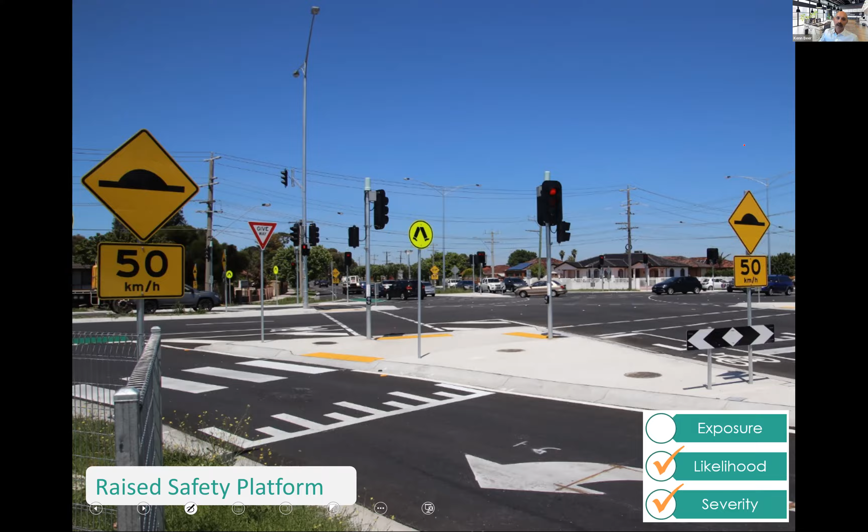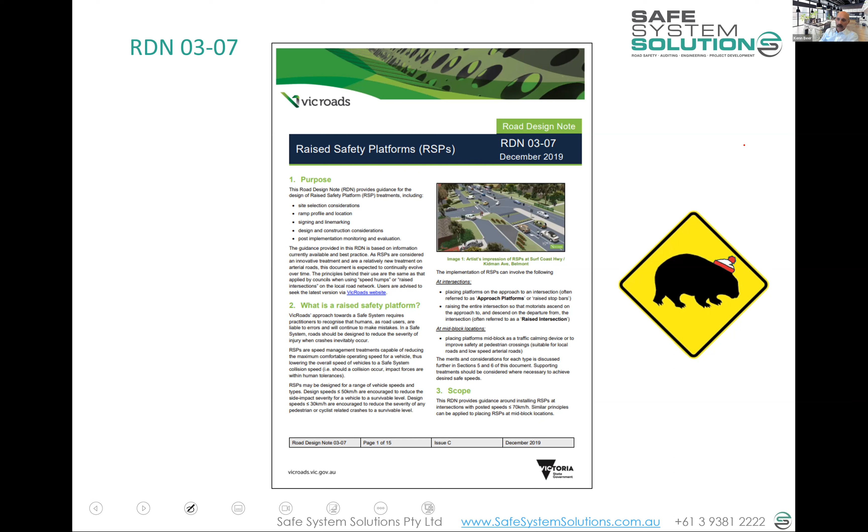So I think there was a request there for some guidance, so I'll point you at 2 documents. Raised Safety Platforms, Victorian Government Road Design Note 0307, has some good information about ramp grades and the like at different speeds. But 'The Effectiveness and Implementation of Raised Safety Platforms' has some really great detailed information produced by New Zealanders, and really solid work.

It dispels a whole lot of myths and rumours about these - like trucks can't go over them, buses, all the passengers will be flung around, the noise will be unbearable, you can't drain them. These are all valid things to work through, but none of them actually play out when you build them. They're just people's concerns because this is new and they haven't done it, and that's what they think. I also think, oh man, this is the most dangerous thing ever, people will hit it at 70 kilometres an hour and go flying off into the houses, Dukes of Hazzard style.

These aren't happening. They're just people slow down and they navigate through the intersection. It works really well.

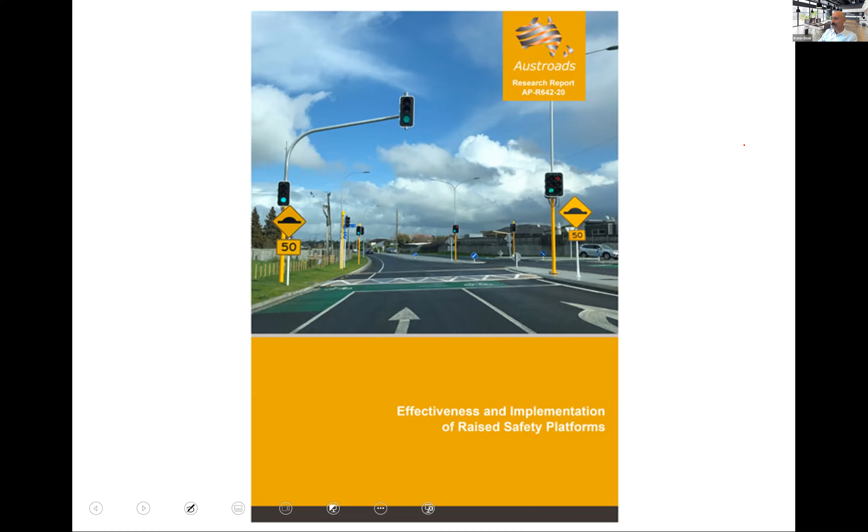Okay, I better keep moving on a bit. But I think what I really want you to take away is the principle that people were acknowledging when they came up with this: even your best designed traffic signals, people make mistakes. We've done nothing to address the severity of incidents as people run those red lights. I still see it time and time again that people think if we put signals in, we can concentrate more on reducing the likelihood of crashes and we will eliminate harm. We're not going to. Even mast arms, LEDs, red light cameras, even regulatory speed limit reductions around it help quite a bit, but we're still just reliant on people behaving without anything physical for them to navigate. As soon as you change that physical form, we're in a much better position.

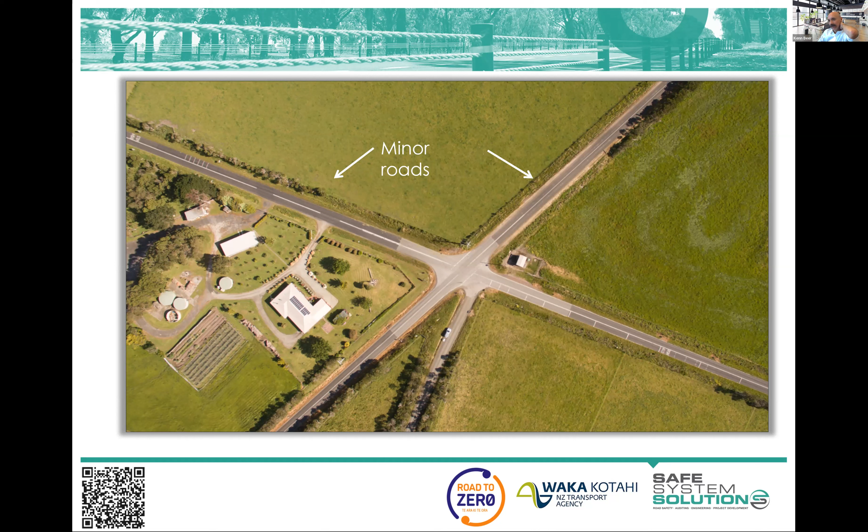I like this example, I won't spend long on it. It's another example of where a region and a group of individuals challenged the norm. They looked at this intersection, they wanted a roundabout, but they couldn't afford it because they had to move a massive telecommunications structure and acquire all this land. It was just too much. So it pretty much got to the point where they were just going to build some right turn lanes and some warning signs and the like. But they challenged that and said that's not going to address the severity of these incidents.

And they pushed and kept pushing hard, and they got to the point where they came up with a compact roundabout, using again some vertical deflection to try to slow vehicles on the approach, but just a much smaller roundabout. Those of you who were at the Road Safety Conference in Christchurch last year, I presented some of the details of this one, but also the design guidance for compact roundabouts, which I can happily provide to anybody who wants it.

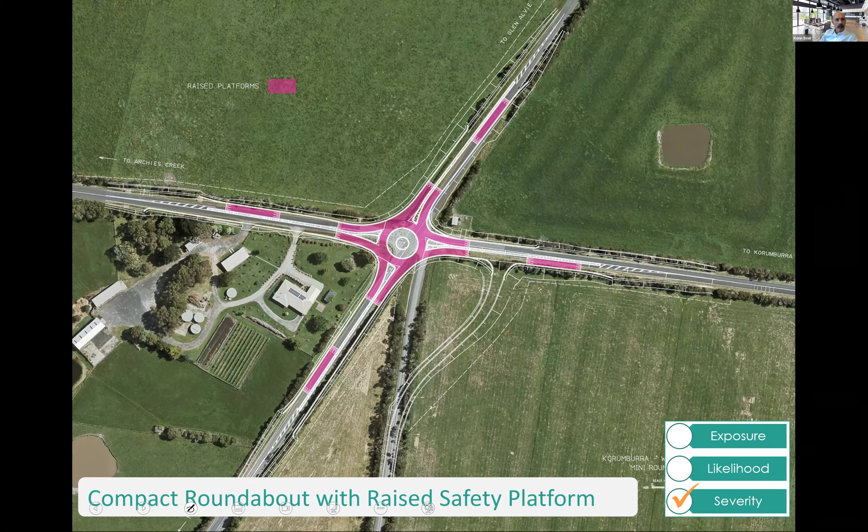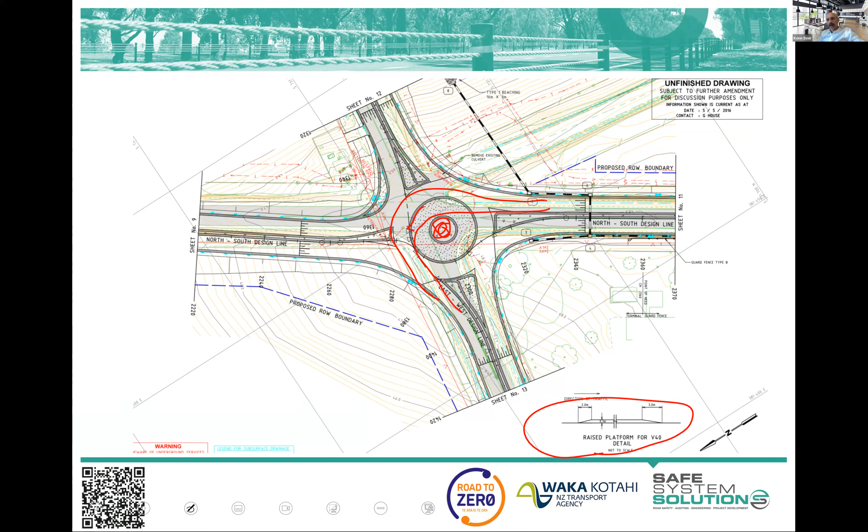Again, you've got shallow raised platform ramp grades, you've got a small actual roundabout, you've got a big concrete apron so a large vehicle can track over that with a big swept path. And you just take less land with your reverse curves on the approach. You don't need to take as much land. You can do these for sort of half the cost of a full-size roundabout.

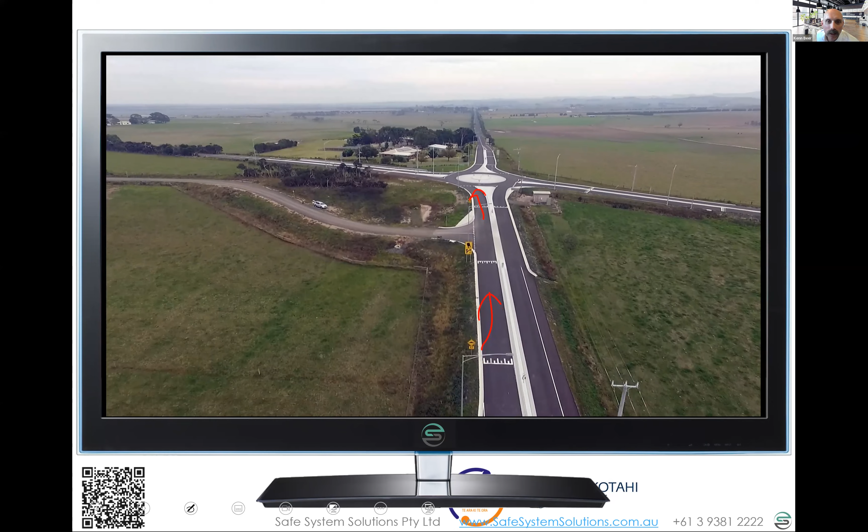So here it is built. You can see the raised platforms, shallow raised platforms on the approach, and then raising the whole area. This is a bit of drone footage. You can see the little roundabout in the middle, and then the big concrete apron, just a bit of a tweak on the usual design for these high-speed roads.

Peter's saying that this is a big roundabout for New Zealand. Okay, there are some pretty small roundabouts there as well, I'm sure. When you're building them from scratch, most people do tend to build some pretty big ones on these high-speed arterial networks for the larger vehicles. But yeah, point taken.

What is the speed limit on this one? Yeah, so it was 100 kilometers per hour coming in, and then just trying to use the platforms to start to bring the speeds down the same way your reverse curves on the approach would. They actually did, in the development of it, reduce it to 80 kilometers per hour coming in for this roundabout. So it's a speed limit reduction, and then you get into your raised platforms.

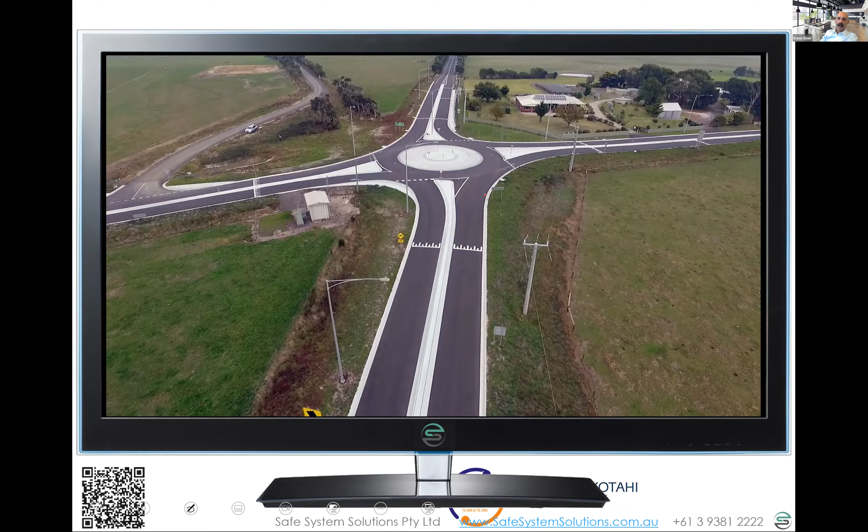Okay, just a one question one. True or false? Traffic signals are not a safe system. True, false, or unintelligible question, which means your question doesn't make sense. Like, what do you want about?

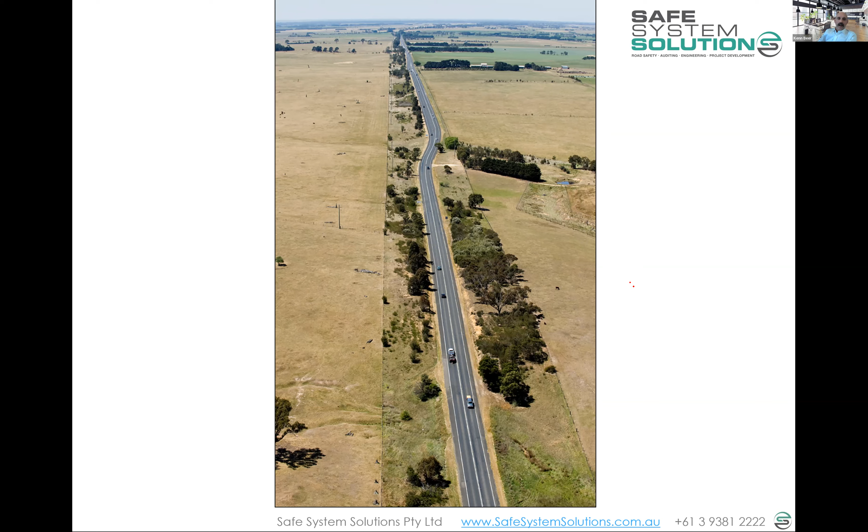We just have a massive amount of the network with these characteristics of high speeds and separation by a white line, and then some small shoulder and runoff area before very severe roadsides.

And in order to survive these, we need people to not leave their lane. Unfortunately, they do leave their lane, and they will continue to leave their lane. We can do everything we can to lessen the fact that they leave their lane, and we will continue to do that, because sometimes we can't afford to significantly reduce the severity.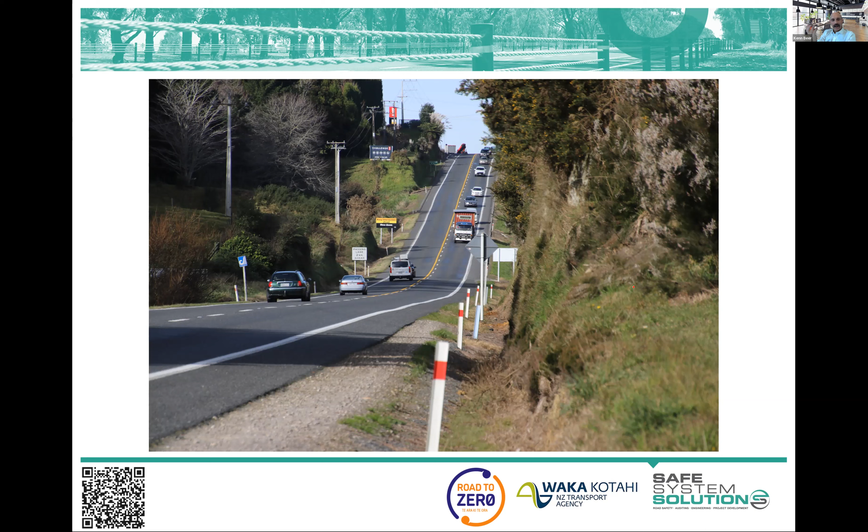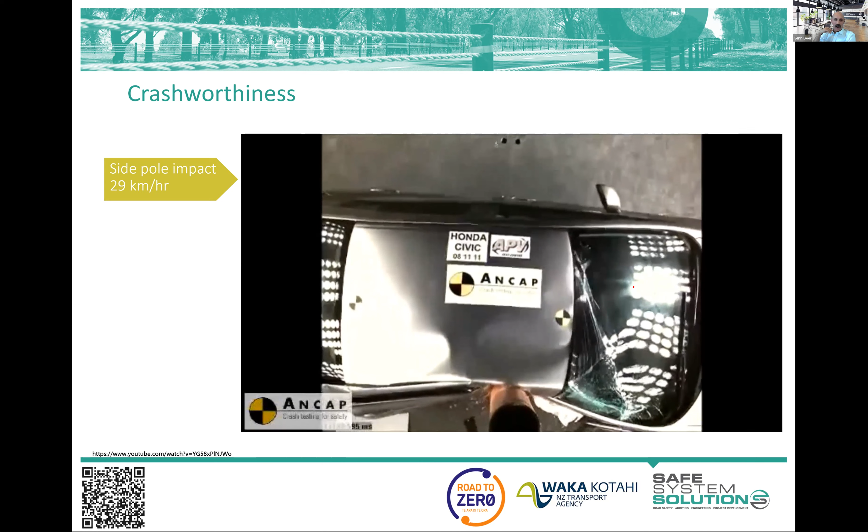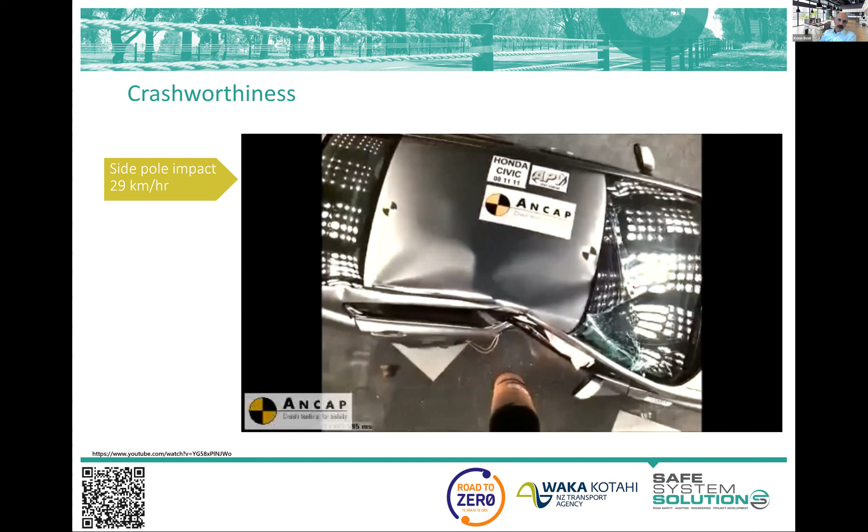But really where we want to get to is that we don't have people being able to get to a point source hazard like this, because there's a lot of energy, as we talked about in the first module, being imparted by a point source hazard like a tree or a power pole, even a culvert. And the amount of energy is just astronomical. So yeah, this is a pretty severe crash coming up.

So just be warned here. This is about 60 km/h estimated impact speed with this pole. I think I need to.

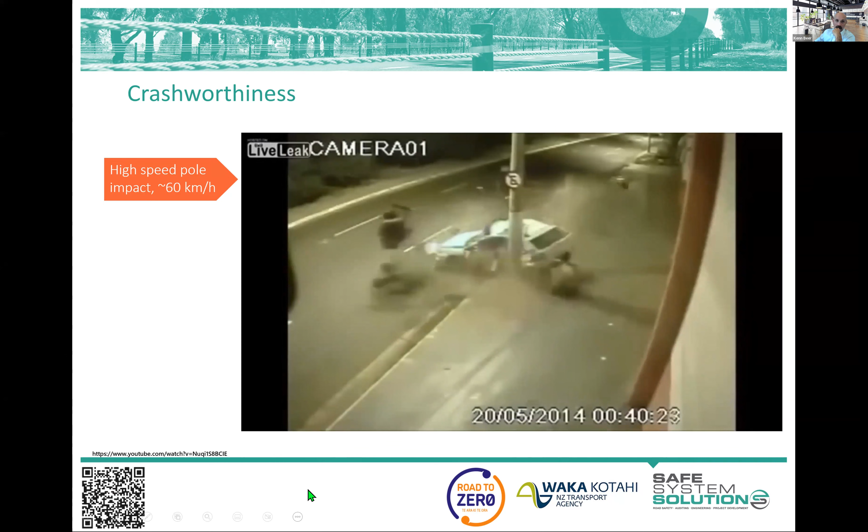So the energy associated with that speed at a single point source hazard is just astronomical, unsurvivable forces, let alone the speeds that we drive near trees and power poles. People fall asleep and leave the road, then yaw because they try to get back on, exposing the sides of the vehicles. It's just a really bad scenario.

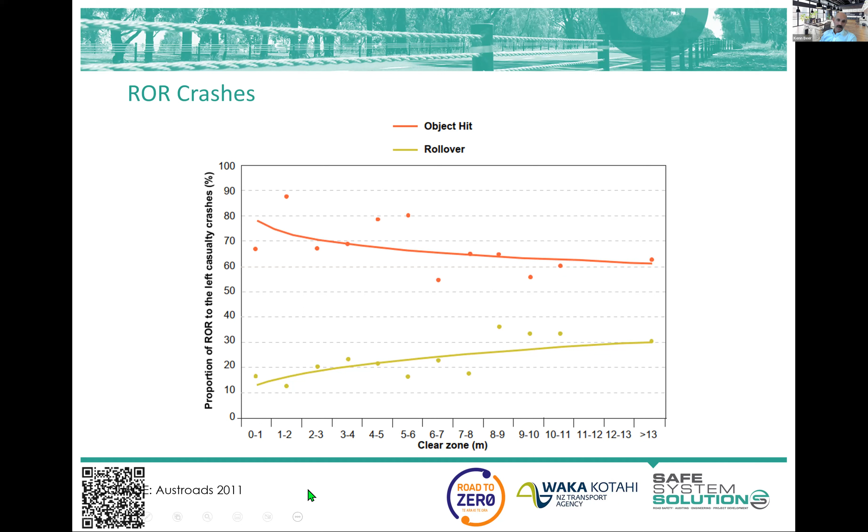Clearing the roadside has some advantages, but they're limited. You can keep clearing hazards and significantly reduce crash numbers because people run off the road, recover, and come back on. But you don't eliminate it. Rollover crashes start to increase, and vehicles travel amazing distances beyond anything you clear, and hit hazards there too. We know risk basically asymptotes out around 4 run-off-road casualty crashes per 100 million VKT by creating cleared areas.

The reality is we just can't clear roadsides, and we don't want to. We want to keep the vegetation, the remnant vegetation, which roadsides happen to have a lot of. The cost of doing it, and the controls involved, often make it unachievable.

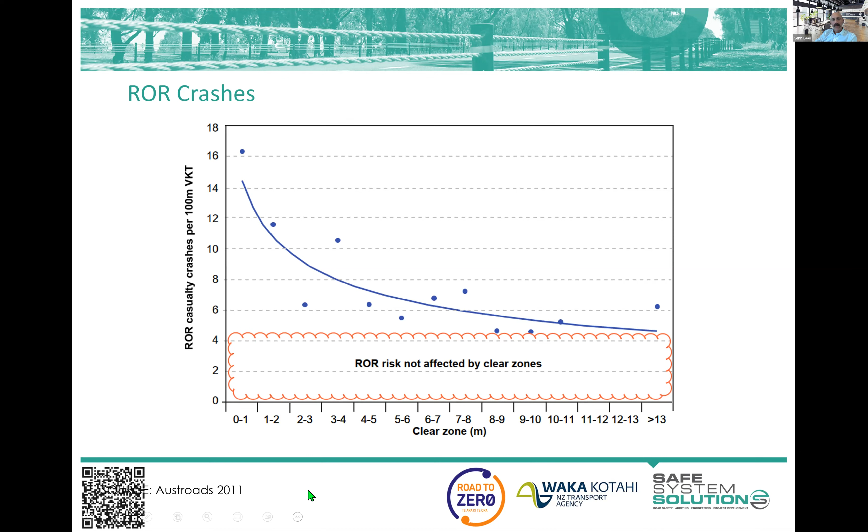So I'll jump through that. Clear zone has been removed from Austroads. It doesn't appear anymore, well, there's a reference saying it's not being used in Guide to Road Design Part 6.

We know clear zones aren't necessarily a safe place to be. People will go beyond them, they'll roll over. We get some good value out of the first little bit, but it diminishes after that.

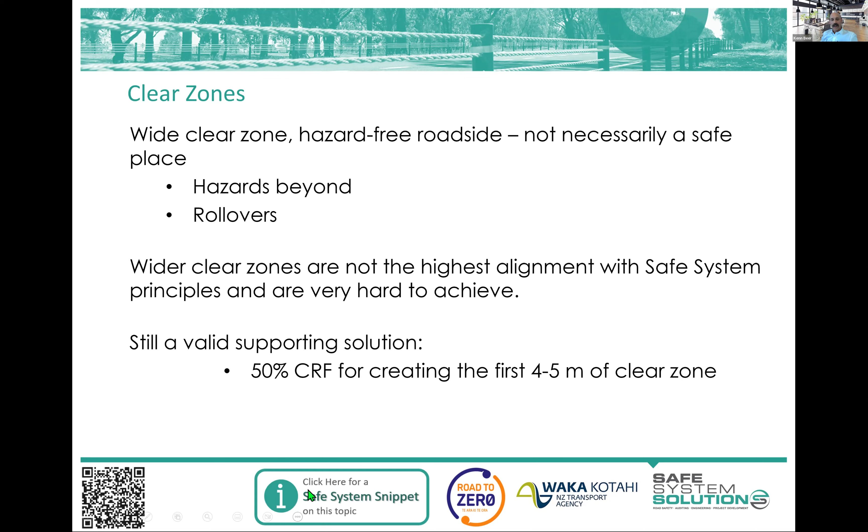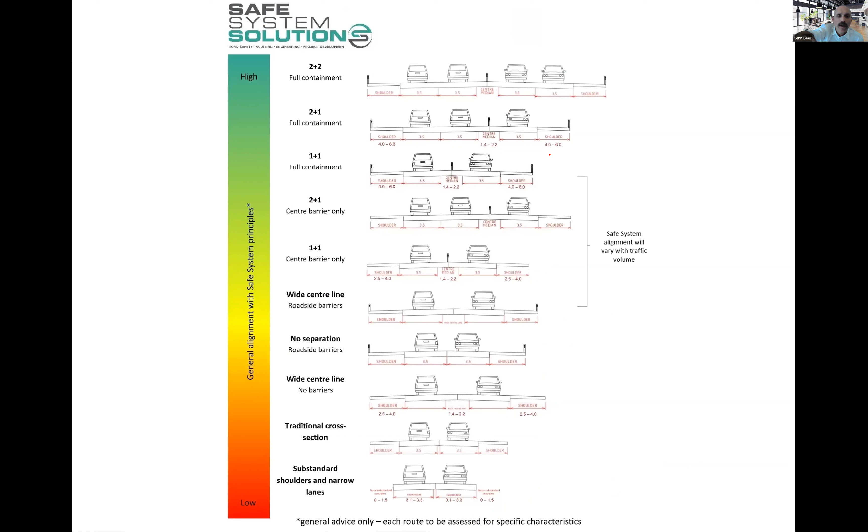Basically, what we're doing is creating bumper bowling of roads: barriers, barriers, barriers, continuous. Just assume people are going to leave their lane, and create this environment where they hit something and run along it. That's what we want, that's our highest alignment with safe system principles. I mean, you could make a wider median with 2 barriers, but at that high level philosophy, that's what we're thinking.

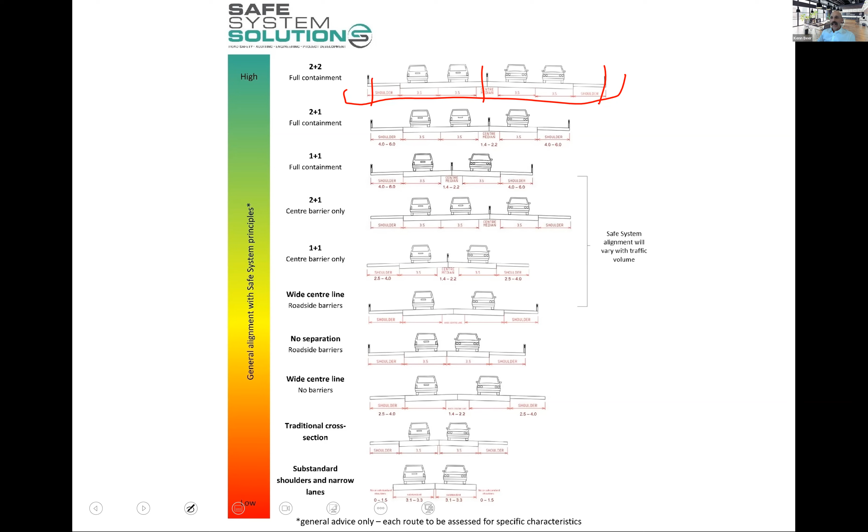Implementation, though, is key, and how you design it. There's lots of design specifics, catering for vehicles that need to pull over and break down, and those sorts of things are important. But I'll end on this before I show you the assignment.

There's not a particular thing about this product as such that I'm interested in, but again, it's about energy management. So here's a crash involving this old Ford, 4 male occupants, 2 in the morning, high speed. It's just classic, this happens all the time.

We don't want them to do it, but the story is so familiar. Pretty much every small town in Aotearoa and every major city, you can point at these happening every couple of years or every couple of months sometimes - we have the same thing happening. Mistakes have been made, it's at unreasonable speed, and they're in an old vehicle with lots of people in there.

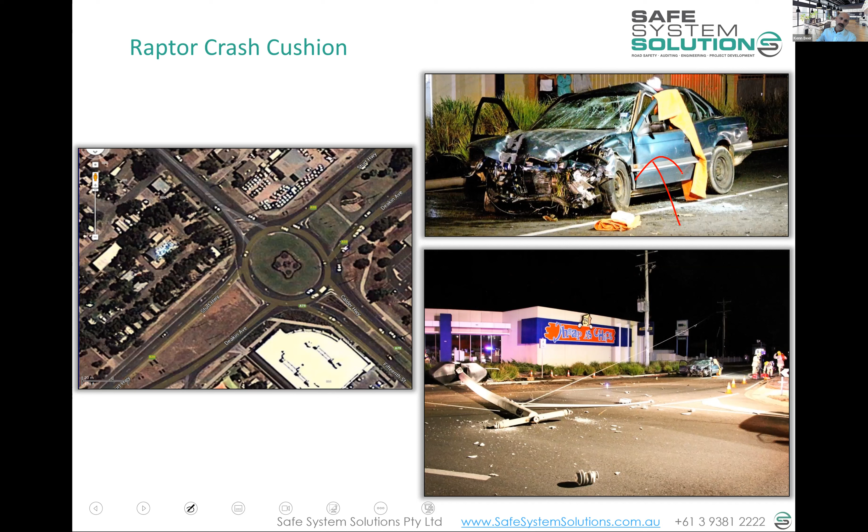And you just go, what can we do about it? Well, this one happened to leave the road and they hit a power pole, but the power pole had this thing on it, which was a raptor cushion. A raptor cushion works in the way that it's kind of like a football goalpost padding - it absorbs a bit of energy, but that's not its major thing that's really good. You get a bit of energy absorption.

That's not going to be enough. The physics of that doesn't work. But what it's designed to do is to rotate when impacted, and the idea is to deflect the energy and run the energy out. So it's not hard connected to it - it's around the pole, and it will move as a vehicle strikes it. I just love the fact that people are doing everything they can to try to manage energy and dissipate energy over time, and not have those harsh abrupt stops.

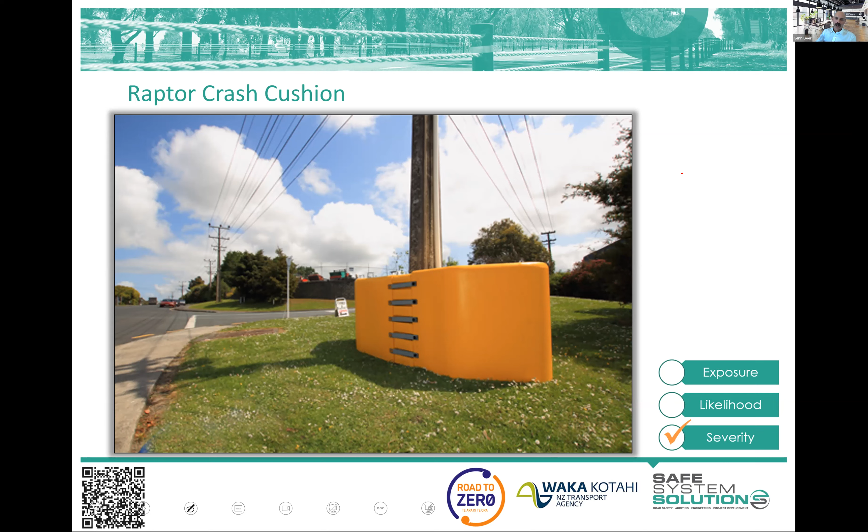We won't do that quiz because I want to take you through your assignment. I'll take any questions as we go there.

Good session, and you did a really good job with starting to think through exposure, likelihood, and severity, and we're going to build on that.

So if we go into the learning management system, we're in module 2. Hopefully, Kez, you're seeing this - I assume you are, shout out if you're not. We go into module 2, and you can see there we've got the presentation. That's the Austroads report we talked about, effectiveness and implementation of raised safety platforms.

So that's there for you. There's that road design note I talked about, so that's where you can find the speeds and the ramp grades, and how to deal with drainage, where to position for large vehicles, heights, and a few other things.

And there's actually a webinar on raised safety platforms. If you haven't seen it, it goes for an hour, and if you're interested, that might be something - it's an Austroads webinar, so you might want to have a look at that. Road design note we wrote on compact rural roundabouts is in there as well, just for your interest.

And then you've got a quiz, of course - again, that will be quick, but here's your assignment. So let's click on the assignment, and what you'll see is that you have 4 days and 7 hours before it's due.

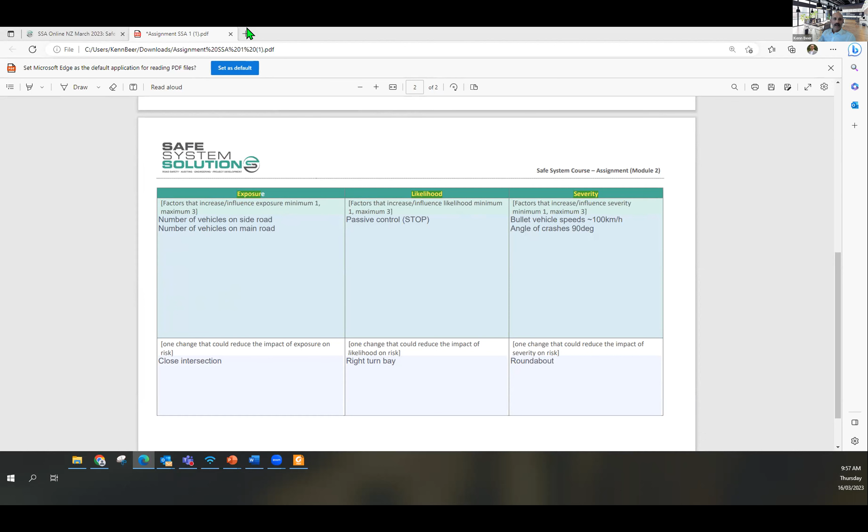So then you save the PDF and save that locally somewhere, add submission, drop it in here, or click upload file, find your file, upload a file from here, choose file if you want, or just drop it in from anywhere, save changes, and you're done.

As easy as that. Now, a couple of things as we're in our last minute - if you are struggling to understand what exposure, likelihood, severity means, get in contact with us. If you can't access the system, get in contact with us. Can't work out how to upload, get in contact with us. We're here to help you get through this. So just contact the training email or whoever's got emails, and we will help you through it.

Kez, have I missed anything? No, just that there was a question about should they give consideration to historical crash history at an intersection, things like that? No, not for this exercise. We don't need that. Just go in, what you see, have a look at the influence of exposure and likelihood and severity.

Oh, it says in general for an SSA. Yeah, so I'll explain this in module 4, but crash history generally correlates with the end outputs of safe system assessments in terms of the score, but you don't use those to drive your scoring, right? They're just a thing you can use to check, are we on the general right path here? I'll explain that more in module 4, I promise. I can't see any other questions.